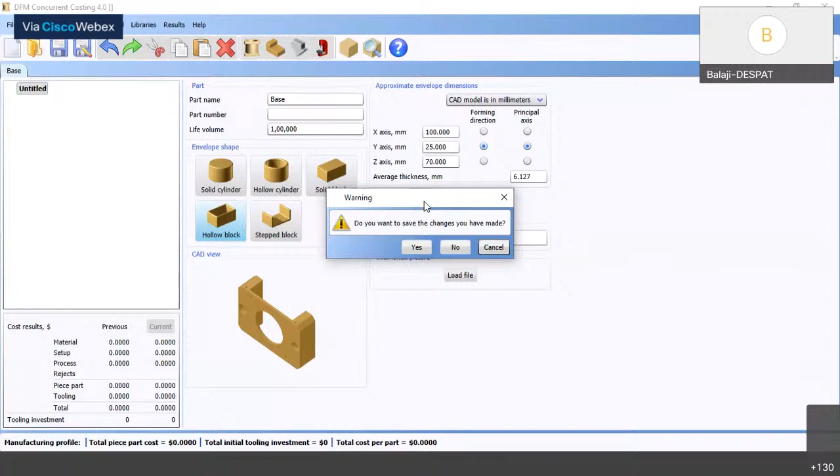Because today we can look at the plastic session, DFM for plastic. Now I will show how to import a CAD model and we can do plastic DFM analysis. So I want to import a CAD model. First I go to external CAD model, load, or you can go to this solid block icon, load CAD. You have to press that and click base.step file. Any format like STL, STEP or IGS can be imported in a DFM file.

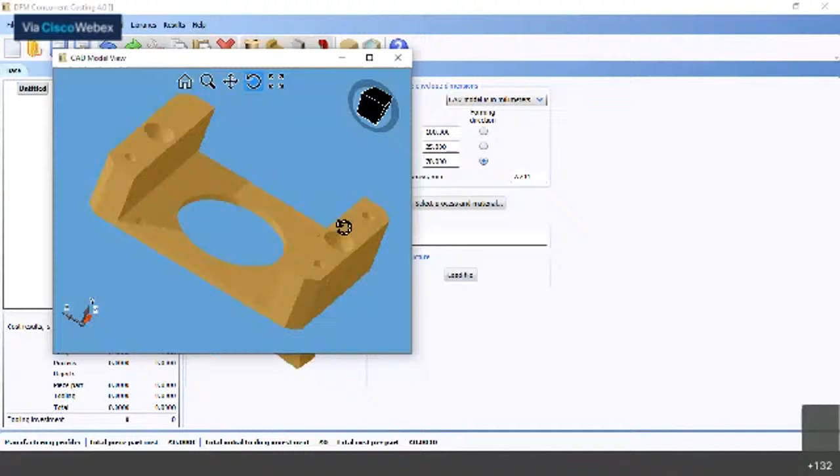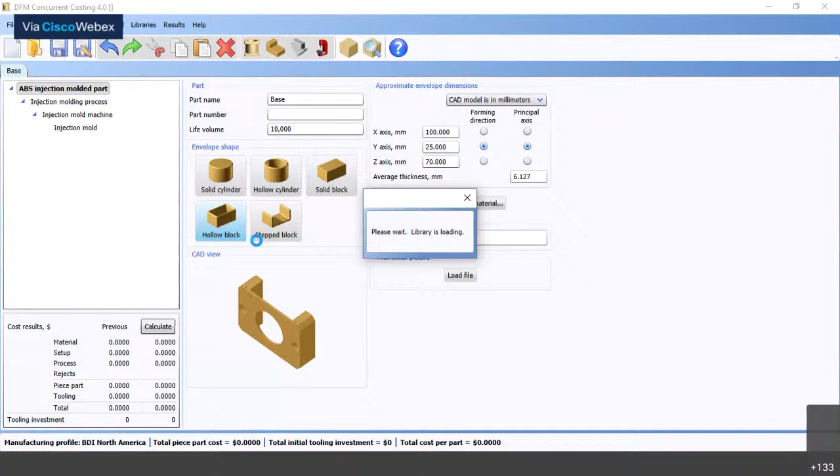So ABS is a good engineering plastic. We can choose ABS with injection molding and click OK. Part volume is shown in a yellow orange color. It's imported from a CAD model. So as of now we have done the primary operation. Now we have to do the secondary operation, like inserting a machine tool setup. To drill a hole in a part, we have to do a secondary operation. I can choose a generic drilling center machine and click insert.

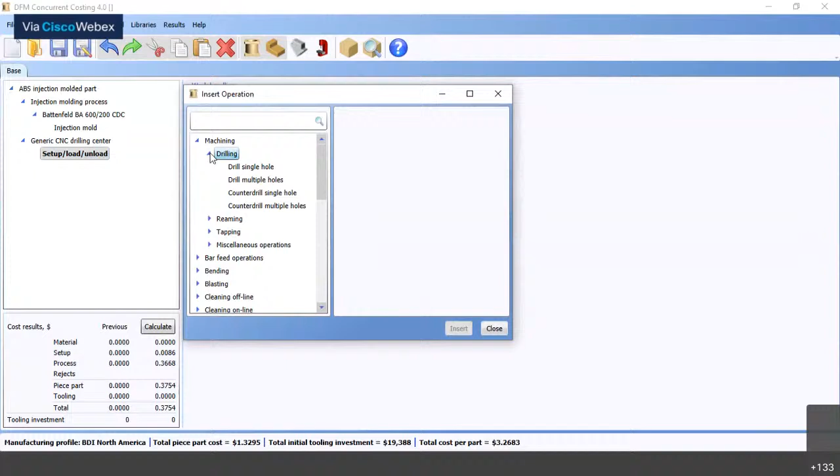I want to drill a hole. So under insert of the machining, these options are there. I will choose drill single hole, or you can choose drill multiple. For sake of presentation, I will choose drill single hole. So diameter of drill hole. In this, a geometry calculator icon will be there. Just click that one. So we have a CAD model. You just have to load that and we can take a value. Length of edge segment in CAD model, you have to click that icon.

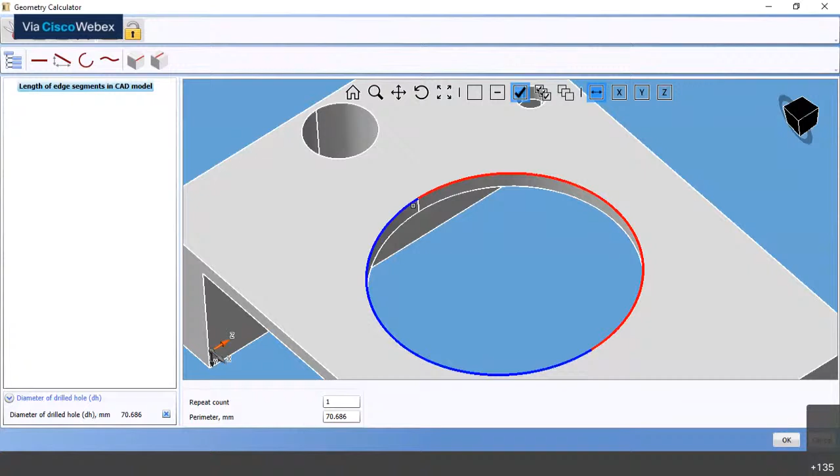Just rotate this. So with the rotating icon, just rotate this one. Now we have to drill that bigger hole. This one hole is there. So keep it as one repeat count and give OK. So the diameter of the hole is taken from the CAD model, and we proceed with the length of the drill hole. Length of a segment, same process. Length of a segment in CAD model. This is the length. We can choose that one and give OK.

Balaji, in this version, there's a correction. The diameter, no? If you click on the geometry calculator, we have to take one segment of that, not both. Just take one segment. Because the new version that I'm showing is the latest version copy they have. Here what you should do is after you do that, you have to take the X, Y, or the Z as a dimension. In this case, you take the X as the marker.

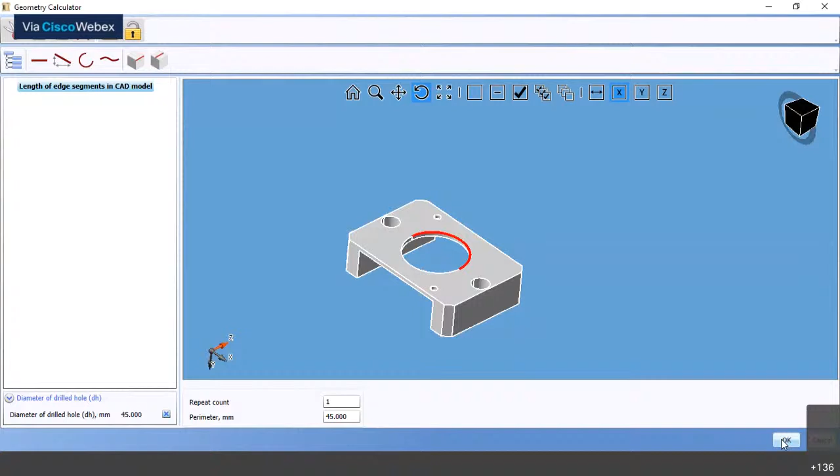So these two to drill. So I've taken it as a multiple hole. As I am having those, as he told, we can select only one. So what you're actually doing is you're selecting one portion of the arc, okay? And if you look at the bottom left-hand corner, you see the XYZ plane.

So along the X plane, if you select on the right-hand side, behind that total length, there are three options there. There's an actual diameter length, there's an X length, a length along Y, and a length along Z. Just for the interest of the audience, Balaji, click on all of them one at a time. Let them see the perimeter at the bottom.

See, in Z it is showing 0. In Y it will show 0. In X alone it will show the dimension. So click on X. Go slowly because it is a little slow, lagging is there. Click on X. This is actually the true diameter.

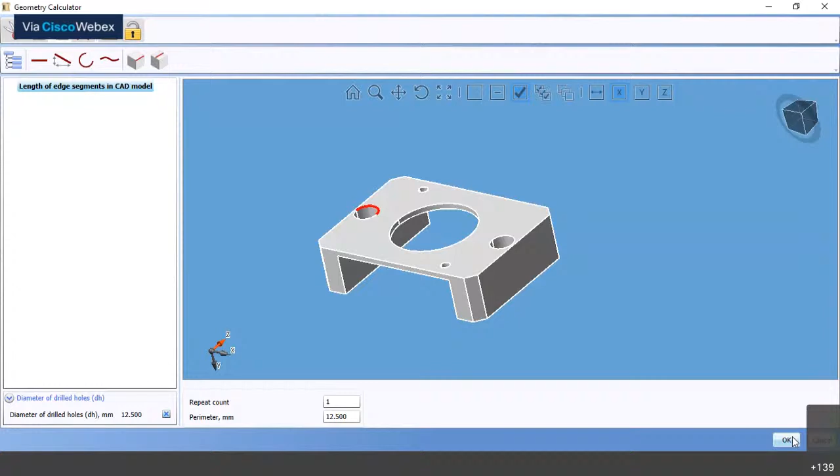No, sir, the 2 were going to drill simultaneously. Correct. Leave that as 1. You have selected to drill multiple holes, correct? Okay, sure. Leave that as 1. Repeat count as 1. Okay, so he has selected the diameter of the hole. Click on it. I have to choose the length of the drill hole.

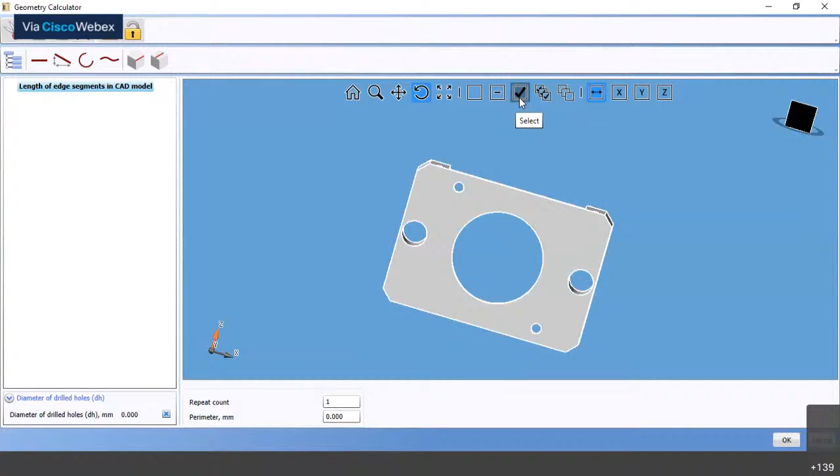So for 2 identical holes I want to take another option. These 2 holes I am going to drill. So the length I am going to capture from the two holes. The length is captured at the bottom.

This 2 repeat count now is the number of identical holes drilled, which is 2. So as he told, if we choose drill single hole, we can give 2 as repeat count. We have chosen drill multiple hole now, so the number of identical holes drilled is 2. And one more thing, Balaji, it's okay, I think we get the drift. Can we go to the process chart, Balaji?

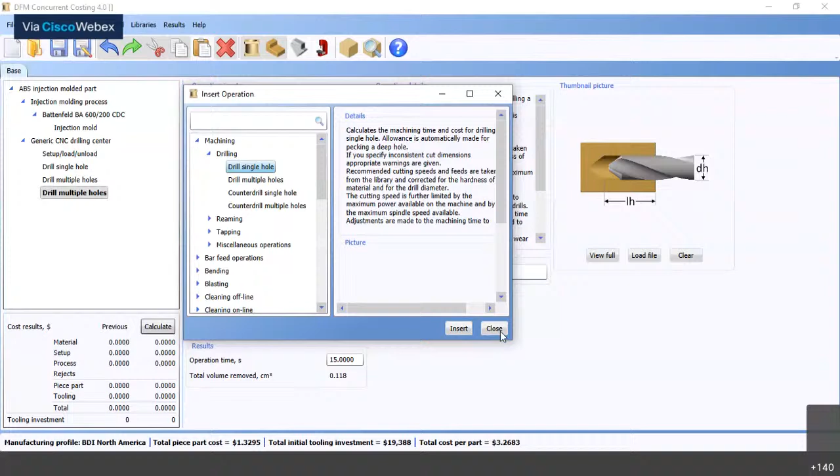So if you see here on the left-hand side, you have single drill hole, multiple hole, right? Normally, as a part of DFMA, the definition of DFMA, ladies and gentlemen, maybe this is another tip that you want to record: it is a systematic procedure to analyze and quantify product design. I'll repeat. DFMA is a systematic procedure to analyze and quantify product design. Those institutions and companies that have adopted this systematic approach are able to quantify their designs very well and find different ways of making improvements.

On the same lines of thinking, when I'm building this process chart, imagine if this was a product that had multiple such holes and features. It'll just be drill hole, multiple hole. So what we normally would do, if you're in a company and have a process chart that you follow, you would actually have titles for each of them. For example, in this case, you can click on the drill hole in the process chart and call it dash centre big hole. Next, multiple through, you can give it a name after it. So every time you include a process, make sure you identify it uniquely.

But you may say, sir, this is only a project I'm doing in college. Maybe you understand it. Let us say you look at the same project 2 months from now, or you send it out to somebody who has to review. It should be easy for them to review it and understand, oh, okay, this guy is taking this feature from that drawing and that's what is marked here. So that systematic procedure includes having your process sheet identified very well. That's how you'll probably find faster success when somebody is reviewing the process sheet they already have, manual or otherwise, and comparing it with your DFMA documented process sheet.

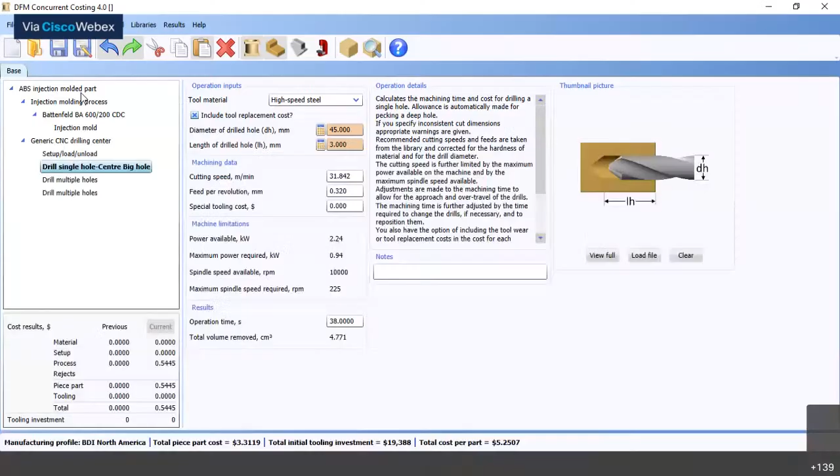Yes, Balaji, please just continue. I think they get the idea of how. Now, one more thing I'd like to tell you, Balaji. Keep your system on. Keep your CAD model on. Wait till I say I'm done and then we can come off. Now, if you look at this part, can you open the CAD model, Balaji? Please save this file. Don't delete this file. Save it if you want to come back to it.

If you look at this part, ladies and gentlemen, it is an injection molded part. Can you move the CAD model aside, Balaji? Come on, move the CAD model view to the side. I want to see the life volume and all those details.

So now, if you look at a volume like 10,000 pieces, normally the features which Balaji just showed, like drilling holes and all that, would probably not actually be a secondary operation. You would get these features done as a part of the injection mold itself. But in the interest of this demonstration, he has done this, showing what if you want to drill secondary features. That is the objective of this demo. I hope it's making sense.

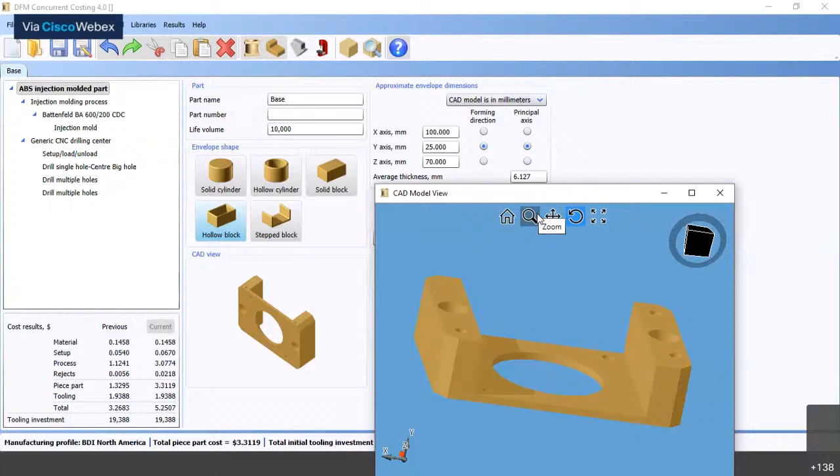For a plastic part, these kinds of features can be precisely molded in the injection mold itself. Making sense? But let us say you're not doing it, you want to just make one part. Balaji, can you make a copy of this one and make a material selection as nylon? First of all, save this. Rename the part as base dash nylon.

Yeah. And go to the top first level and make the quantity 10 parts, life volume. And select the process and material as machining. Yeah, full analysis. Great. Take nylon.

Ladies and gentlemen, what we're showing you today is: I have a part idea. I'm exploring for injection molding. Then I realize, oh, I only have to make a prototype at my college. I don't have to make 10,000 pieces. What do I do in such a situation? Then you can just take the resin. You don't need the filled plastic, it's expensive. You can just take the nylon, the next one. Plastic, plain resins. No, come down here. Yeah, that one. It's a plain resin. Yes.

I want to just machine 1 or 2 parts for my project. I don't need to make 10,000 pieces. You have a decision to make like that. So I'm just doing another alternate material. I could also do it with ABS, but okay. So it is asking you to switch. It's switching the data from your previous selection of ABS and injection mold to the new one, so it's asking your permission. You say yes. Now you have an entirely different approach to looking at the same rectangular cuboidal part, and you start machining it from a block of nylon.

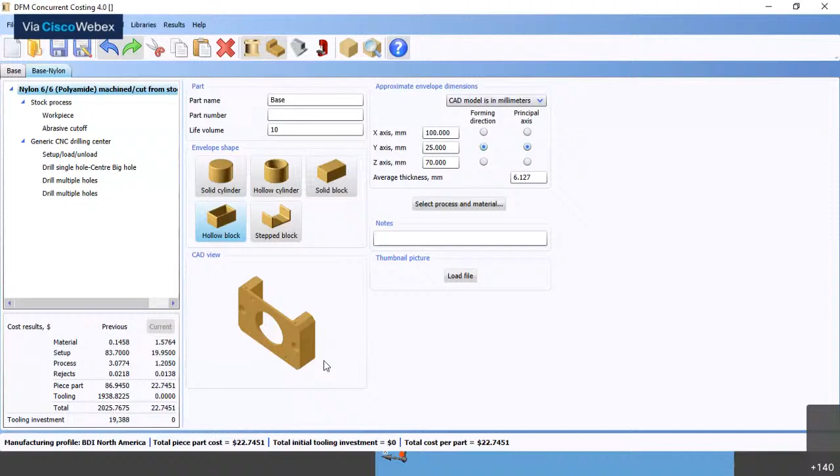So go back to the nylon, Balaji. As you can see, we have retained some of the machining steps from the previous exercise, the generic CNC machining. It is valid for a part like this. But the previous primary process is changed to a stock process. Can you go below for the next slide? On the stock process, click on it. You see the data from the CAD software has automatically come and is highlighted in the part volume in orange. Okay. Go to the next item.

Again, let me go back. Sorry, go back to that stock process, Balaji. So you have 10 pieces. It has selected a batch size, showing it as 1, and it's highlighting it in yellow. If I want to make 10 pieces, it's a bad idea to make one at a time. See, the setup cost is so high, 19.95. Can you see it on the bottom left-hand corner in the cost results?

So a logical or better solution would be, if I want to make just 1 piece or 5 pieces or 10 pieces, it's better to do all of them in a single setup. So I would rather change the batch size to 10. Can you do that, Balaji?

So when you have your ideas charted out on the left-hand side in your process sheet, review it one by one. If you want to sit with an expert who knows how this process has to be done, how this commodity has to be done, he can contribute well. Go line by line item, and that's how you'll probably get a very good, accurate result of your prediction. Why? Because the systematic approach is what will help you to solve. Any of these elements can drive the cost. Just know that. I hope it's making sense.

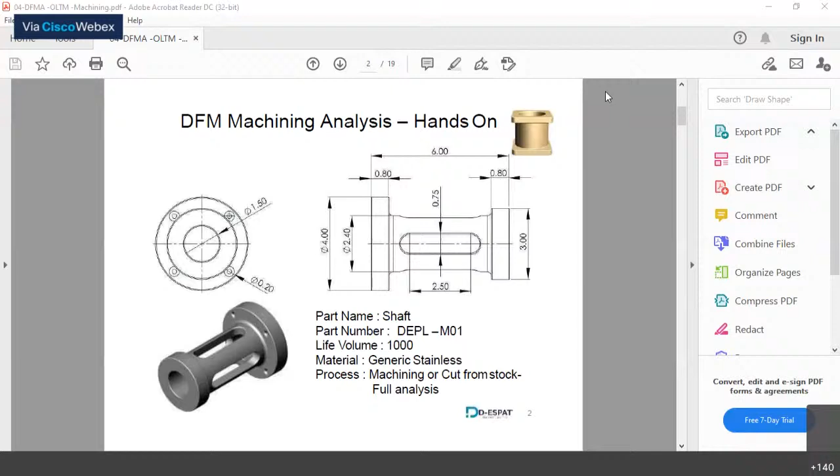Do you have the drawing? Not this one. The drawing which we have to do as a demo. Ladies, this exercise is given to you. You will probably do this exercise in your free time. But for the demonstration purpose, we have a simpler drawing. The image has been given to you. Do you have this image?

Balaji, I think. Okay, Balaji, can you stop your sharing? I will take it from here. I'm not able to see your screen. Organizers, can you help me to share my screen? Just assigning you, sir. Thank you. Now you can. I can? Okay, thank you so much.

Are you able to see my screen? If you have not got this image at hand, take a screenshot now. Okay. Now let us look at this component for a minute, and I want some participation on the chat box. Here's what I'm asking you to do. This is a component that's going to be machined. So you can imagine I have a raw stock I have to take. What should be the shape of the stock?

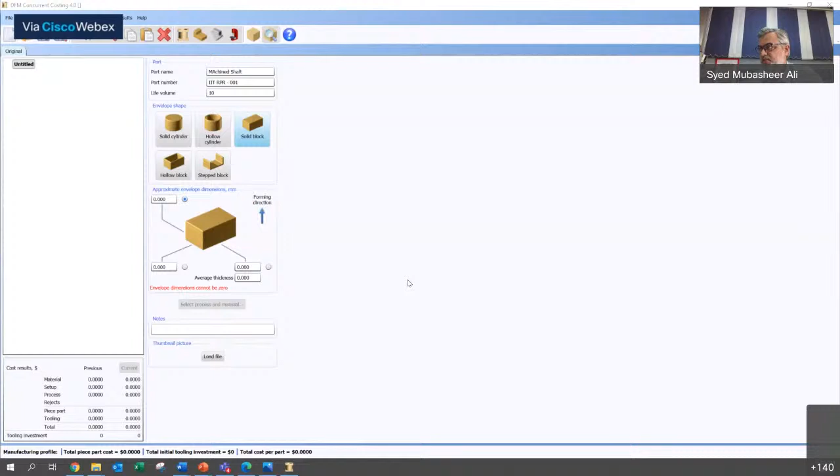So what do you think is the envelope shape I should select for this geometry? Absolutely, solid cylinder. What could be the overall dimension I should give here? What is the diameter and length here? No. So here's the answer. Hold on, guys. Whatever you give as envelope dimensions, please know this, that this is always of the finished part. This is not of your raw materials. I hope that's an important learning. You will always give the envelope dimension of your finished part, not of the raw material.

So this is going to be a 300 mm length, and this is going to be 75 mm, right? And since it is a solid cylinder, you could give a different average thickness. You could go as high as this. You could say the average thickness is 75. It doesn't make a difference unless you're selecting a hollow cylinder. Okay. Yes, always the finished part. Now let's go and select the process and material. Now we'll go to machining.

This is a very good crowd. I like it. Everybody is participating well.

So there, if you see in the machining, there are different opportunities. For the sake of this learning, we're going to take the full analysis. For others, if you want to learn, you're welcome. While you have the software with you, you can go to the help menu. In the help menu, you'll find online tutorials.

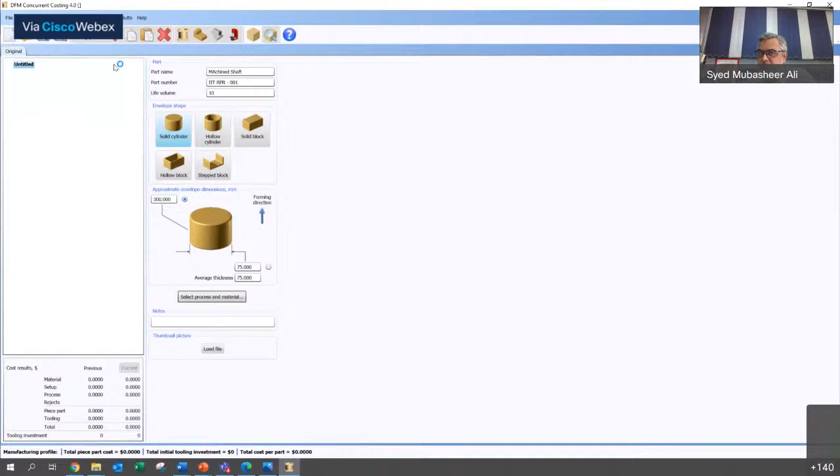If I click on online tutorials, ladies and gentlemen, you will find a lot of videos that are on our principal's website of the previous and this is the new version. You're free to go look at it, download it, and learn from this while you're having the software at your disposal. Okay. Please feel free and do some interesting stuff and share with us. We'll be happy to share it to the rest of the world of what you're capable of doing.

So let me come back to this and take machining and take full analysis. And I'll just take, for the sake of this presentation, maybe an aluminum alloy and say OK. So what you're getting now is, again, remember, when you select this first level selection, you get the primary process and all activity related to the primary process will be listed on the left hand side.

I repeat, when you select your geometry, when you select the life volume and then go and select the process material icon, and then when you have a commodity combination, what comes out for you is this primary process. So depending on the process combination, you have this list on the left hand side, long or short, depending on what immediate activity is connected to that primary process. Making sense? Say making sense or yes in the chat box.

Okay, so now there are a few ways I wanted to see how this, especially from a machining perspective, impacts. Yes, batch size usually is a divide by 8 or a divide by 10. That is a default setting, but we can go and change it. And that's the first one amongst the selections I would make and calculate. And the impact of the batch size directly hits on what we call a setup cost.

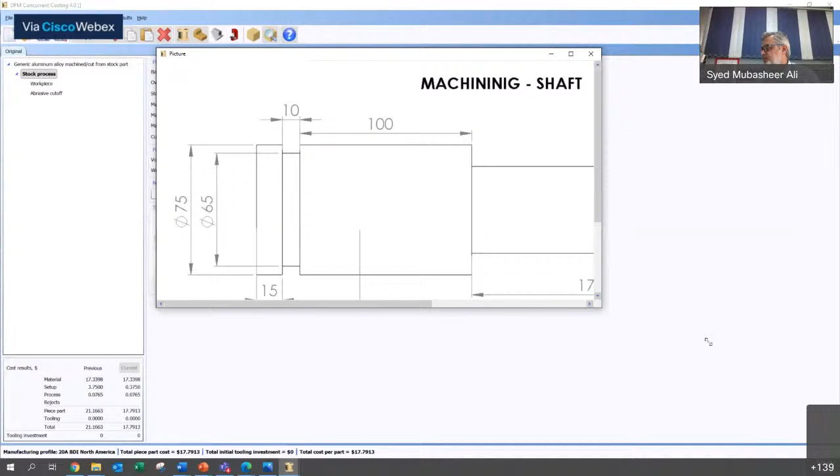So another thing is, since I'm working on this part and I have a drawing, I can load this file. This is something that we've not shown you previously. So here's what you can probably do. I can go to this part and pick up this shaft drawing and get it in. So every time somebody who's reviewing my drawing knows where this is. Oops. This picture is gone somewhere else. So I could look at it. So you can have records of such steps all through your different stages. So you can load files at different stages if you want. Yeah. Let me get back here.

So the round bar is fine. This is the cost that is taken from the database. This is a material, scrap material cost. Now it's asking, imagine you have a long stock, if you're seeing my screen. Now you have to cut it into segments of whatever lengths you want. So what method of cutting off you are employing will determine certain amount of cost here. So right now, if you're using a bandsaw and you calculate, this is going to be the impact on cost. If you select some other method, it's going to be an impact on cost. It's more expensive than this one, right?

So normally the defaults will be the most economical setup, but when you're actually doing a practical, you may not have this. So you go and closely select whatever you have as your practical setup and do this. Guys, you have the tool at your disposal. Himanshu, please try that. I have 20 minutes to finish this demo, and if your time permits, we'll explore all of those details.

So the next thing that I want you to know is this part volume is estimated from the geometry, and as you keep machining the part, remember we are going to start machining the part, right? So as you start machining, you'll be removing material. As you keep removing material, that material removed gets automatically subtracted from this volume, and that will add up directly to the weight of the product. This is one way you could do this exercise. But let us say you have imported a CAD geometry, then you will see this in what color?

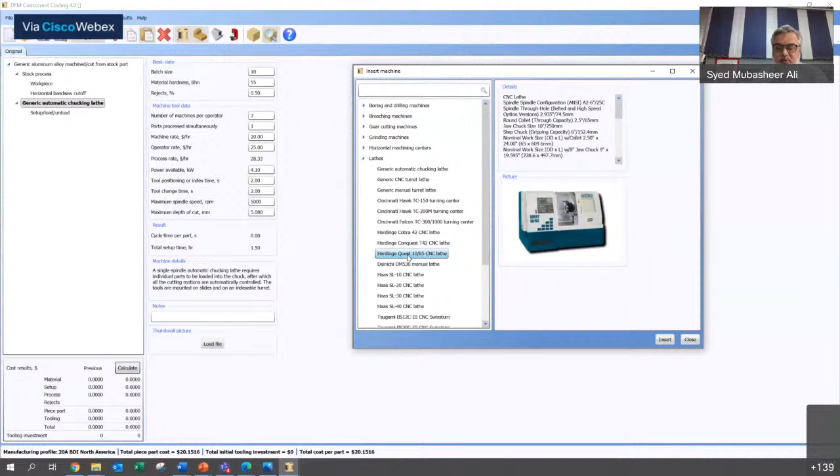One more thing. I'm looking at all of you as DFMA future champions. Don't get very benevolent and select complicated products or machine tools to do your job. A good DFMA guy will select the most economical machine, because your job is to be as stingy as you can, getting the best time and the lowest cost for the product you want to build for your company. Get it? So if something can be done with a simple machine, select it.

If your handicap is that the only machine you have is something like this, fine. Otherwise, don't get too benevolent and select fancy machines. Nothing fancy. If you can do it on an economic machine, that should be your benchmark for costing. That's how we work. Fair enough. So that's the machine that we have selected. Sorry, it has selected twice, so let me delete it.

And you know all this, right? You have the opportunity to change business rates and so on here. But something you may not want to change is the basic process parameters of this machine, for example the spindle speed, the kilowatt hour of the motor that operates this machine, and so on. Since it is a lathe, I'm more comfortable having a lathe with a 3-jaw chuck because it's easy to lock and unlock.

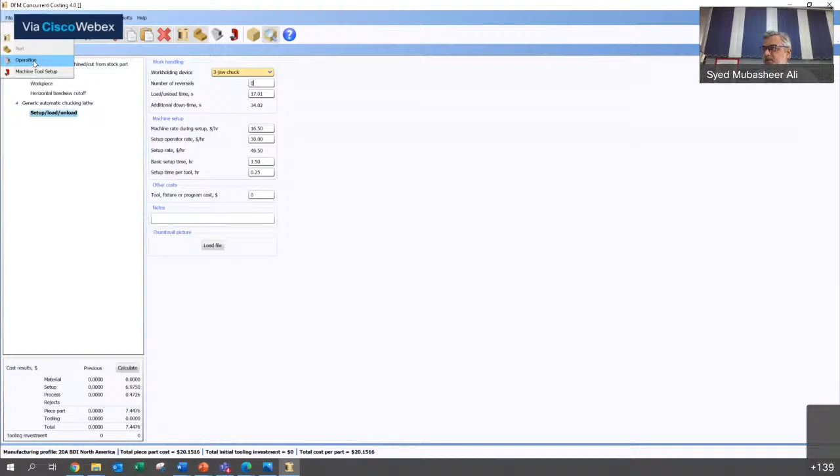Right now you see it's also asking, do you have any reversals? I am not selecting now. As I keep building the steps, if I think I need a reversal, I'll come back and add the reversal information here. Let's go add an operation. I'm going to machining and I'm going to say turning. I can select multiple of these. For the sake of speed, I'm going to say rough and finish cylindrical turn as my first option.

What I want to do there is refer to this drawing. Imagine that this part is actually 77 in diameter and about 310 in length, right? So I have to bring the whole thing from 77 to what diameter? 75. I want to do that through and through for about 300 mm length. Okay, let's go do that.

I'll say the workpiece diameter DW is the outer diameter. This should be 77. I want to machine it to DM. You see the drawing here? That should be 75. Absolutely. And the length I want to machine it should be 300. Get it? I give these 3 inputs, I calculate, boom, I get all of this information. Ladies and gentlemen, I want you to notice, and I think I've emphasized this previously.

Many people think, oh, this is one big Excel sheet calculator. Well, there is more to it than this. Because if I show you the operations library for turning operation, and if I edit the formula, that is the formula that's running in the background, ladies and gentlemen.

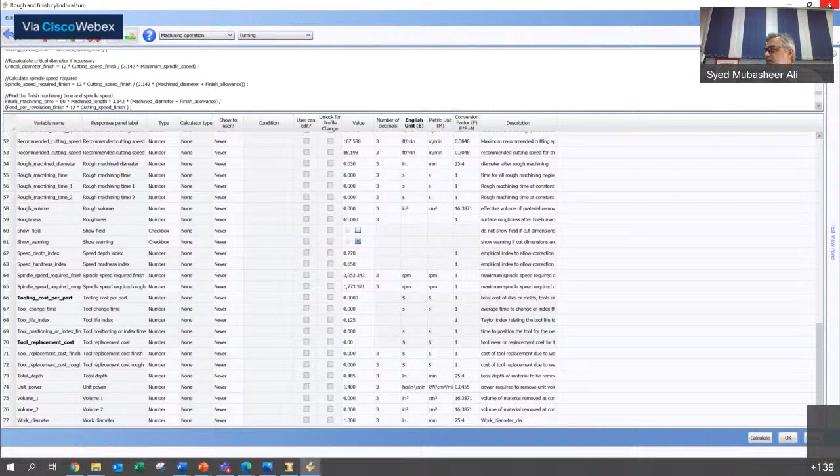Yeah, and this is the number of variables, about 77 variables running in the background. Okay, but is the customer or the user bothered with it? No, only those things that he needs to focus on his design is going to be here for his review.

Okay, so what comes out here apart from the cost is, I want you to notice that the actual machining cycle time for this operation is measured by the software. The amount of material removed is measured by the software, and if you go up, if you remember, this volume will keep on getting changed, rather reduced, as you keep on doing the machining steps. Okay, so I've done one step here.

Let's go back. Now imagine that we've run it for 300. I want to machine this for 175, reducing the diameter from 75 to 50. So I'm going to do that step. Okay. Let me insert an operation of rough and finish cylindrical turn. Now I would start with 75 as the diameter.

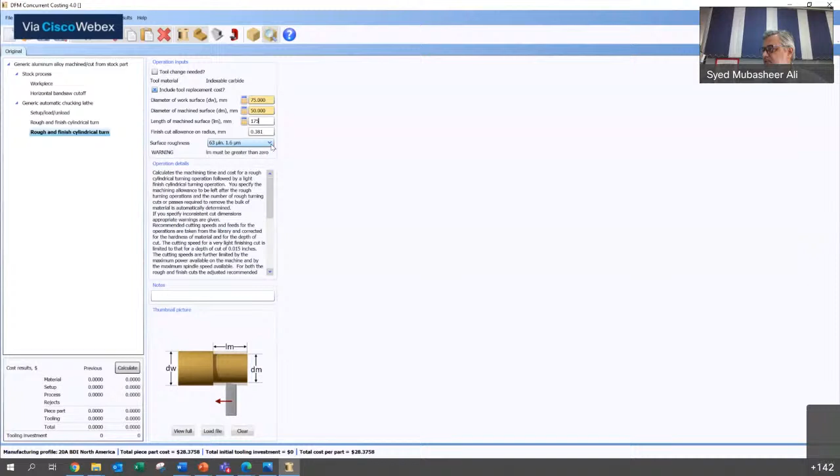Just give me a second. 50 as this dimension for a length of 175, and of course these allowances, you have choices to make, but right now I'm leaving it at the default to quickly run through the steps. And as I said earlier, I would normally name this stock.

I would give names like this so that if somebody wants to review my design, they know what these steps mean. And sometimes if it's complicated, I would actually take snapshots and put them as my own thumbnails here to make my explanation much easier. So two more steps I think I will add. I hope you're getting the drift of it. So let's create this profile of a dent here, and let's create a drill on this side.

So as I insert an operation of grooving, this perpendicular groove makes sense, right? So I will select that. Maybe I'll rename it a little later. I'll also do the drilling of this hole, add that, come back to it, and say this groove is about 10 mm. It has to go for a depth of about 5 mm.

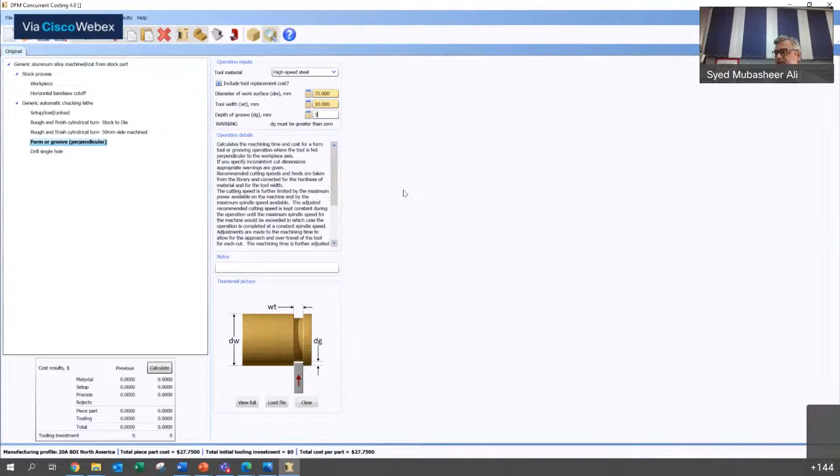Okay, so the diameter of the work was 75. Guys, you're following me, right? Tool width is 10 and the depth is 5 mm. So that defines a groove, and the single drill hole is on the right hand side. So it's about 16 mm diameter and about 50 mm length. So I'll say diameter is 16, depth is 50.

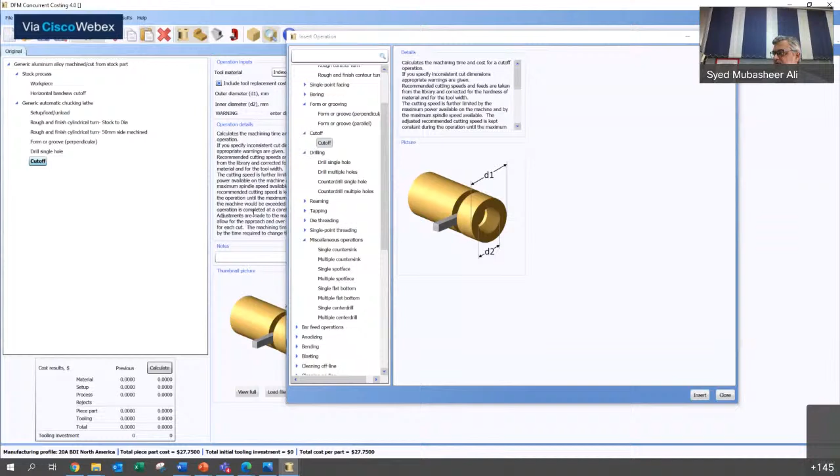And it is finished. So I have done all of these features. What I have to do now is maybe face off or cut the part. I'll insert an operation to cut off the part. Okay, normally this is not exactly right, but you need to understand you definitely have to do this step finally. So I'll cut off the part from an outer diameter of 75 to 0, correct, and calculate.

And all of this closely defines my process. There's nothing like why not, right? When you think of why not this, why not that, gentlemen, just know this, that there is no one way of fabricating this part. So if you have a challenge with how your colleague or somebody else is doing it, take it up, paste it, rename it Himanshu's doubts and do whatever you want to do. Rechange, reorder, create a reversal, and see the impact right there.

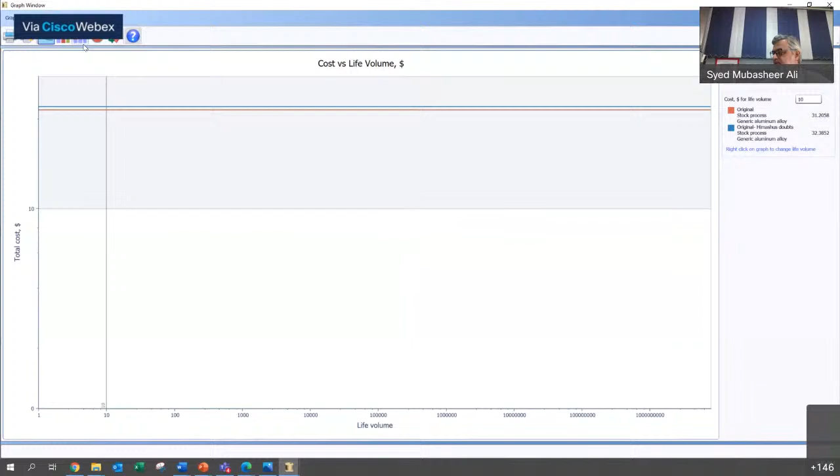Get it? So that's that. You see, this is the impact of the original Himanshu process, right? I just added a reversal there. That's why it's adding that cost. Okay. So how does it play out on cost? You can see all of these details. So even finding finer details like this makes sense.

Now, one more thing is don't get stuck up too much if you're a part of decision making, because you see there's almost 70-80 paisa difference, which is substantial. Another thing you should know is right now I kept the setting at 4 decimal places. If I set this to 2 decimal places, it's not so significant, right?

So make sure when you're doing reviews, you are keeping your decimal places to the right thing, depending on the volume that you are making. Because if you're doing 1 part, 10 parts, the 4th or 3rd decimal place doesn't have so much relevance or significance. So I hope you have a copy of the exercise that is to do the machining.

If you have any questions around this, we will take it up now, or we'll go on to the next topic, because we have lots to cover for today. And we also want to discuss an exercise that we would like you to take up.

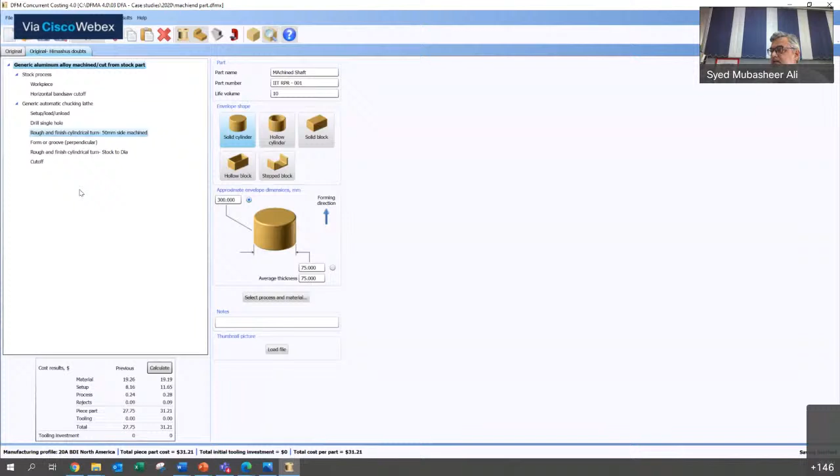Okay, let me make sure that we are okay with the starting, right? What we are supposed to do is... so this is your workpiece geometry that you started with. So what happens is the value of this geometry is estimated in your material cost. Also, I want you to know that in the stock process, an important aspect is there's a cost of material and there's a scrap value of a material.

Now I have a question for you. If I make the scrap value 0, okay, please note the question. If I make the scrap value 0, what do you think is going to happen to the material cost of my component? Is it going to go high or low? Right?

So what it means is you are having a raw material cost that you are incurring when you buy the material, and then when you are machining, the wasted material you are able to sell off at a price. If you're able to sell off at a price, that is subtracted from the overall cost of the material. So if I have a good recovery rate for the material, I'm just putting an arbitrary number as 1 and using it for calculation, then that cost is recovered.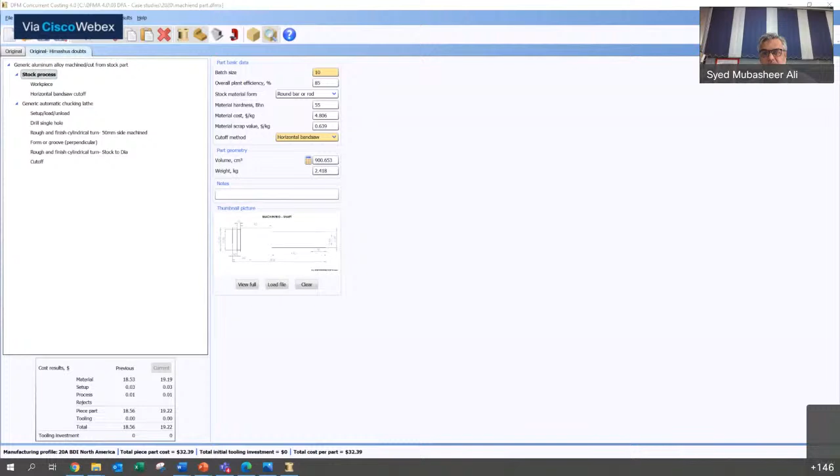So if you're able to see my screen, I wanted to show these activities today. Now, yesterday we built a part. Today we've done the component in DFM. I can actually show you how I can bring these parts into DFA, where the cost that you analyzed can be imported directly into the DFA tool.

So just give me a second. I'm trying to open my... I have two screens here, so. Too many things. So I'm opening up the DFA screen. Let me take up the old part that we did.

So if you recollect this DFA exercise we did, no, you're going to get the assignment now, Rana. Hang on. What's the hurry? Going somewhere? You're with us till 11 o'clock, right? Super. So hang on. The assignment is coming. It's a simple assignment, but it's in depth. If you can do it right, there's lots we can learn from that simple exercise. I'll be sharing it with you.

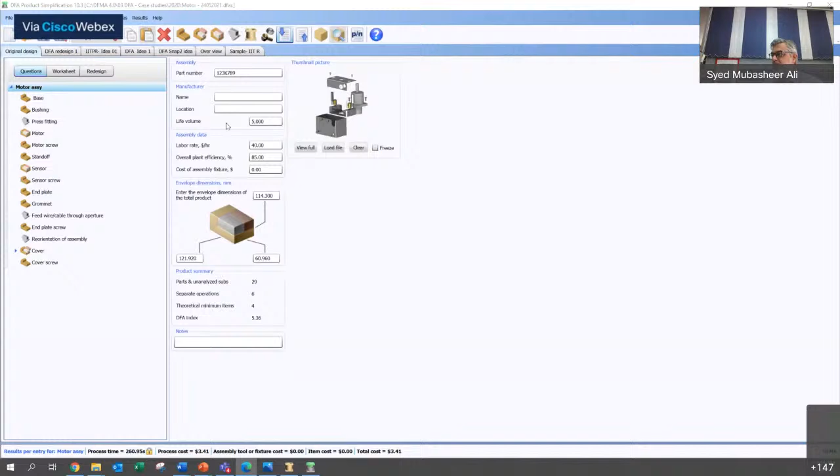So if you remember this end plate, this component, right now I got it as a part, correct? Now you also remember yesterday in the DFM, I had done analysis of this component as a sheet metal part, if you recollect. Right, we did this part yesterday as a sheet metal part.

Now imagine the DFA was done by some set of engineers sitting somewhere else in the globe, and they're accessing a server, and the actual part level costing for the components was done somewhere else. So through concurrent engineering, a quick demo is what I want to show you here. I can go to the end plate, I can right click and say, hey, connect this to a DFM analysis by linking it to an existing file. I can link it up, and about where I put this up there.

Just give me a second. DFA case studies.

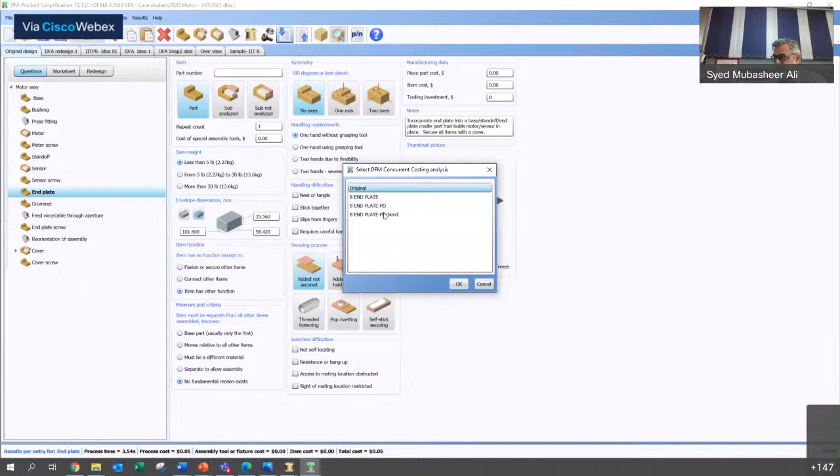And now when I open this file, it is saying, hey, in this DFM file, you have 4 different analyses done. Which of them do you want to link to? I want to link to the last file because this is the most precisely estimated file. I can click this and look at a few things that are going to happen. Look at this image. Right now it is that of a part, right?

When I click this and look at this manufacturing data in the DFA file, 2 things I want to show you. The image of the existing part before I link it is showing the image of this part icon, and the manufacturing data is something which I can edit. That's how these menus are right now.

But when I link it to a DFM file and I say OK, you see the image changes to a symbol like this. It means it is a thoroughly analyzed DFM file that you've got here, and the manufacturing data is locked in. You cannot edit it. Why? Because this is being driven from this file.

So imagine I have different parts, different vendors or different teams working simultaneously. As each of them are doing work, you will get these parts into this. So when you're going to do your group exercises, which I'm sure you'll be given opportunities to do,

Repeat. Okay, Shashank is asking me to repeat. Can somebody? Oh, you can't voice out. Can somebody do something on the chat box to backtrack what I just said? Okay, one more time.

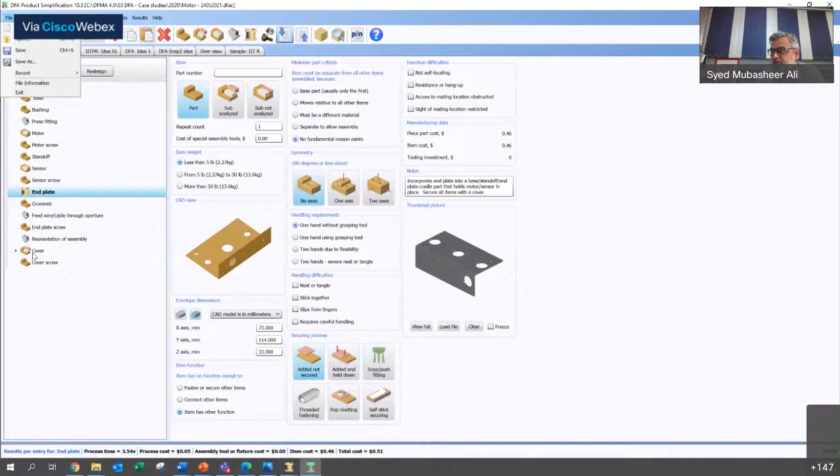Let me take another part. What I'm trying to show you here is, if I have an idea of a part, and let me take the cover for that matter. Okay, I've taken an entirely different part. I have a part. I have done an analysis of this idea at DFM level for this component. Yeah, let me take this image. You can imagine this sample, right?

Now at this level, I only have an idea of these parts, that I want to have a base part. It should have a motor, a sensor held by sensor screw, and I have an idea for cover. This is one activity I've done in the DFA. Simultaneously, let us say my other team members have also done a thorough analysis of the component. Let me take another component, for example. Let me take the cover, which we did on day one, cover IITR. Okay.

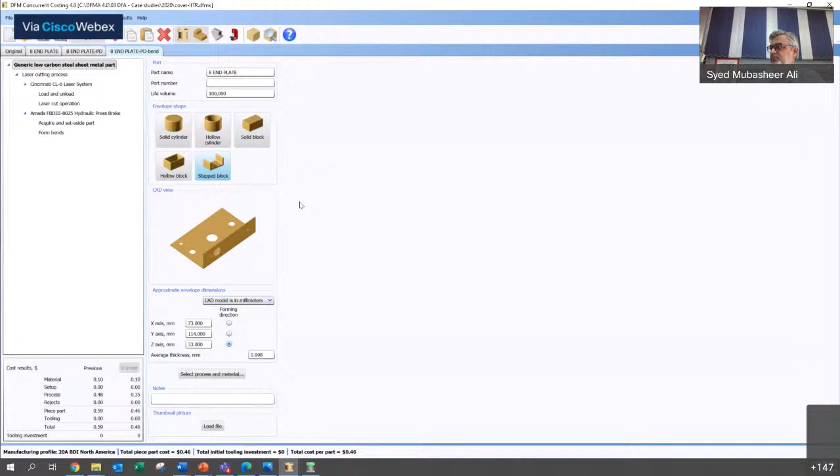So remember, we did different kinds of covers. We did casting, casting with the Greaves database. We did it in sheet metal. We also did it in plastic. For the same geometry called cover, we have a DFM file that has been analyzed. What I'm trying to show you here is, I have this component and I have an overall estimate which I have keyed in. But now I also want to have done a thorough part level costing of this component.

And I want to link them, because DFA and DFM are actually true concurrent engineering tools. They can work simultaneously, transferring data from one to another, thereby helping you to get rapid feedback of your design intent, giving rapid quantification of your design idea, thoroughly getting part level cost, and also getting assembly level estimates for time and cost of putting your assembly together.

What I'm showing you as an example is, I'm able to link this file. How do I do that? I click on the component, I right click and I say DFM analysis. I have two options. I can create an entirely new analysis, but since day before yesterday we already did the DFM analysis of this component, I'm linking to a file. When I ask to link to the file, it's asking which of the files you want to link to. So I will say link it to the cover file.

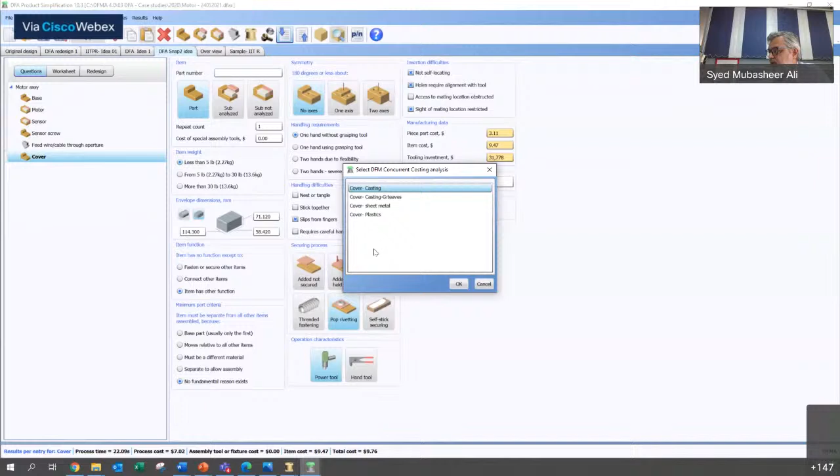When I bring up the cover file, it says, hey, this cover file has 4 different analyses. Which do you want to link this component to? Let's say I want to link it to the plastic, and say okay. The data of the plastic component, the tooling cost of the plastic component from the DFM file, you see this value 38,000, 14, 6.69, all this will automatically come into the software. Making sense?

You are welcome. Now your job is to do something like this interestingly and come back to us and say, hey, we've done something of value. Okay. So that was the third part that we did. I think we're good on time. That's nice. Now, I also want to show you something related to this bill of materials.

Let me close this. I don't want to save it. And this is another sample that I want to show you. Sometimes in your CAD software, you'll probably be making your, yeah, there's nothing like true design. It's something like saying perfect product. It's one design. Okay.

And you've already done a CAD model in which you have created the bill of materials. Again, I want to show you here that you can add a CAD model from your software into the DFA file.

And where is the data? I don't remember where I kept it. Just a second.

So I can import a CAD geometry like this. In the DFA, what will come through is the overall XYZ dimensions of the envelope shape. So my setting, sorry, my units are in inches. So let me change this to metric. It makes my life a little easier.

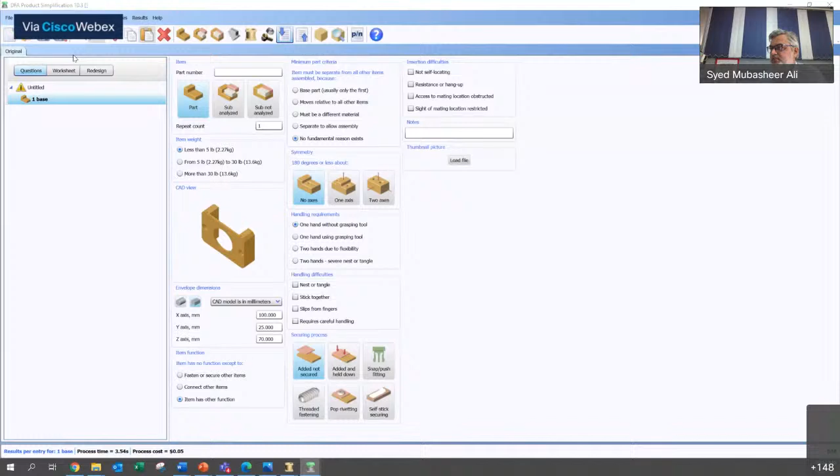Okay. I can also import a bill of materials. So when I say import bill of materials, you have this data example in your exercise in your files also. This has been loaded for you. So I'm taking any of these two options that are there. One is I can have a text file, or I can also import comma separated values, or CSV files as we call it.

Let me open this bill of materials for the motor. Imagine if this motor file was already made. If you want, you can do this alongside with me, if you have the software and you can simultaneously do this, otherwise don't bother. We can send this out. So usually, if you look at it, there'll be a lot of things that the CAD software guy would have done as a part of the.

So normally, let me untick this. See, the data will be jumbled like this. Yeah, comma separated value. So if you select different delimiters, you'll see how the data regroups itself. One of them will work for you well, depending on how the format is imported. Just be patient enough to do this one time so that you figure out what is the delimiter that is working from your exported file. Okay, so this is a one-time exercise.

Second thing is, where do I start importing from? See, this is the name of the file. I don't want to import this. I want to import from row number 2 because this is where the actual data is. So I'll say start importing from row 2. And when I click on next, now it is saying, can you please map your CAD data based CSV file to what you want to get into the DFA file.

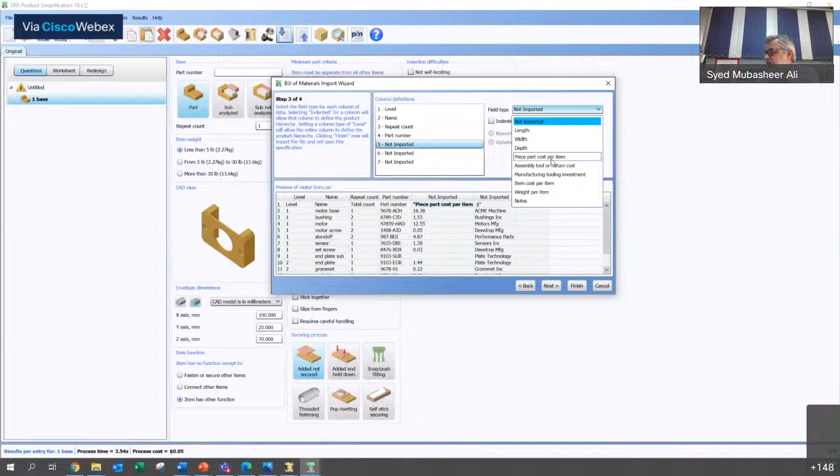Column number 3 is total count. I click on it. For us, total count means repeat count, a word we use as a terminology. So we'll say repeat count. Now column number 4 is part number. So I'll say part number. Column number 5 is piece part. I will say piece part cost per item, so on and so forth. I have not created these lists, but you can go and add this kind of information.

And when you say next, and if you're going to regularly use the same format, you can give it a name, IIT Ropar format, something like that. And I say finish. What will happen is you will get the quantity, the part number, like I've added the supplier name to the notes. So all of that will automatically come here.

Okay, but definitely what you have to do as a user is, this is only creating one kind of connect from the outside world, which is CAD or ERP solution or PLM, into DFA. But once it is here, it is our job to answer these questions so that we get the assessment right. Making sense?

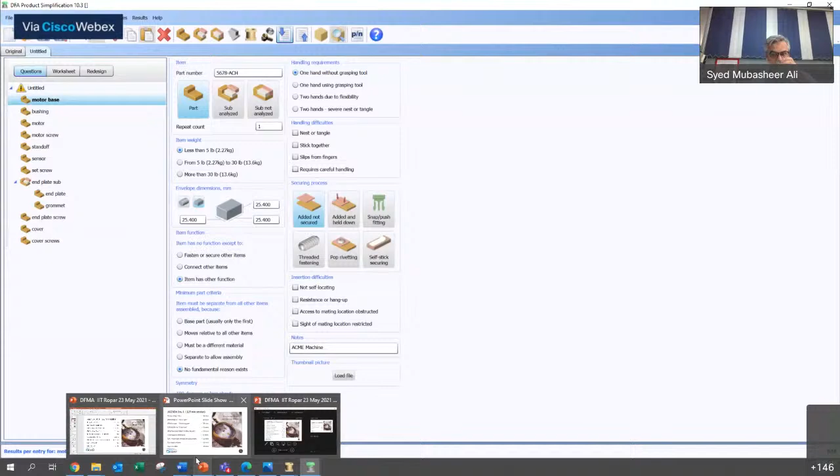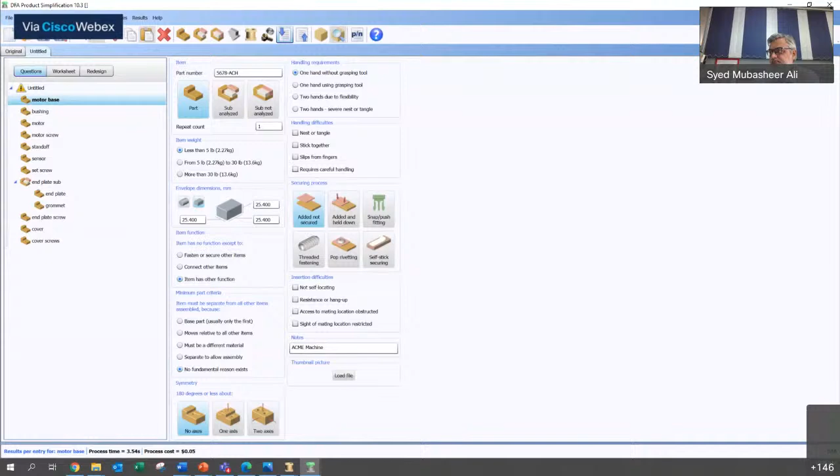So that's the other thing that I wanted to show to you. And please note that there are different types of reports that you can generate from the tool. And there's also ways in which you can customize the reports, and there's also ways in which you can export out the reports. Let me just quickly show you a few things.

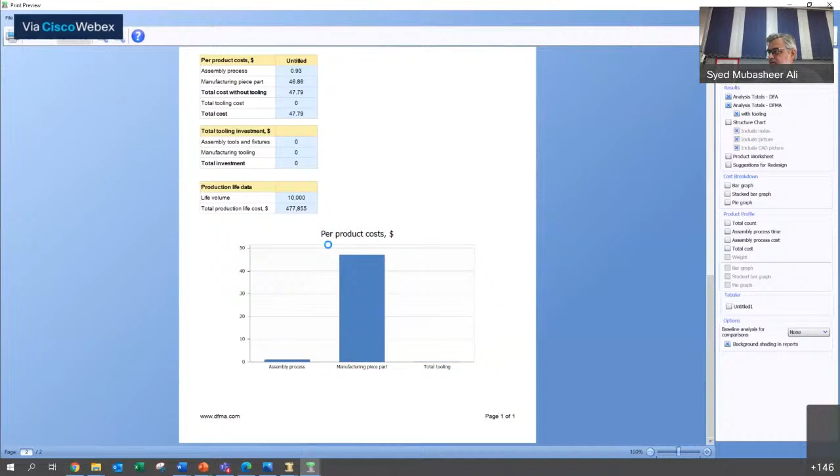Right, so I can generate different types of reports here, one after another, and I can change the currency in the reporting. So wherever there's a dollar value, it will change to a rupee value or whatever is the conversion that you're giving, because the dollar or the value for cost is a part of the large calculation.

I hope you understand. I've shown you 2-3 examples of the algorithms and the calculations that are running in the background. So there, the cost is defined by that value or by that symbol, dollar. Whatever you want to change it, you're free to do it, but also make sure that the other things are also appropriately right. For example, is the labor rate appropriate to my setup and where I'm doing the project or where I'm making my component? That also has to be corrected.

That will make your prediction suitable for the location or for the enterprise from where you're doing this, for whom you're doing this costing. And also you can export out these documents in several different formats. So depending on who you're sharing with, somebody who you don't want to edit, blah blah blah. So that's how you will probably do it.

So that's my exported out file. So you can create an export out file. You have opportunities for changing logo and all of that stuff, which I think you guys could be good at exploring. You can go and change your logo by clicking on that icon here, and you can create several different opportunities for doing this.

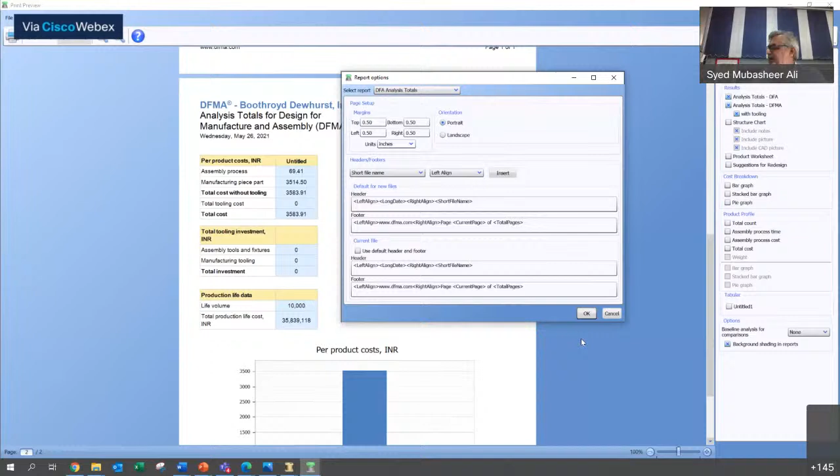There's some customization you can do on the report options as to how you want the margins, blah blah blah. Because at the end of the day, you may be wanting to share your data out to the outside world, like your vendor or your project report or whatever the case may be. Okay, so far so good.

We have 2 or more titles that we want to cover. So I'm going to take a few minutes to show some case studies from a few backgrounds, and then I want you to keep some prepared questions that you may have towards the end of the session, because these 2 things we're going to announce.

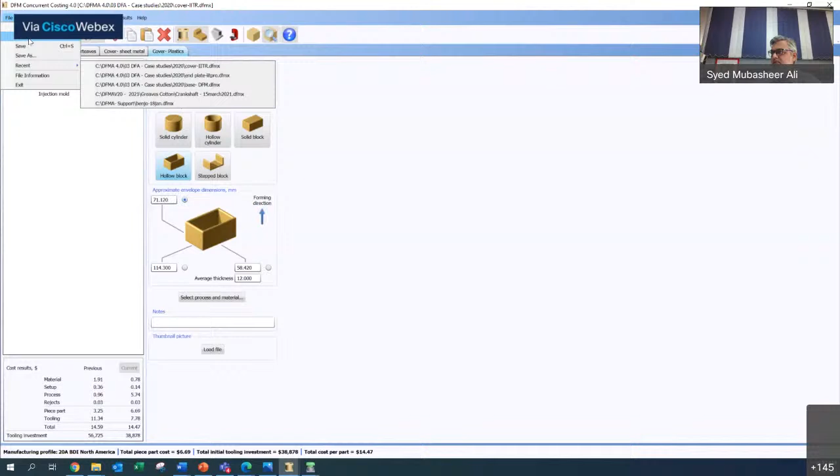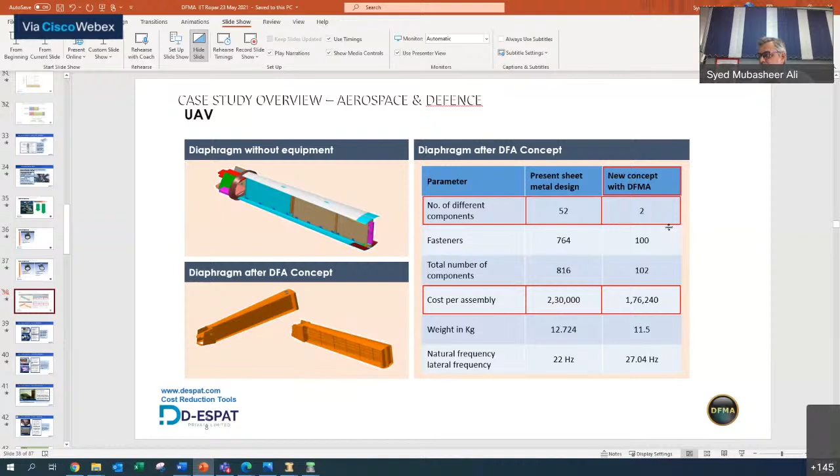So I don't have all of the sheet metal parts analysis, but this is the one finally that was selected if you make it as a singular part. Now this kind of design is sort of disruptive, to make somebody think through from a 52-part assembly to making a singular part, whether as a cast component or as an injection molded component or machining from a raw block, like an example I showed earlier, like this.

But these kind of things bring about high value when you actually explore it thoroughly. Sometimes it could be very positive that you are able to bring about a good amount of savings. Sometimes it will also help companies that have this notion that maybe this is a better idea to do it as a singular part, by proving that it is not a good idea to make it as a singular part.

Thereby, it gives them the confidence to go back to their old ways or make it simpler, multifunctional parts. So the rule of good design is that you should have a good part count reduction in your product, but that rule does not hold good for all situations. What applies to one type of design need not necessarily apply to another. Please be aware of that.

So even if you're facing experts, people with intense experience, when you go into organizations, they will challenge you saying, I know this from so many years of my experience that this happens. Please take a moment to use a tool like this to validate whether that is true or not. Many times you might find contradicting results. Okay. There is no modus operandi.

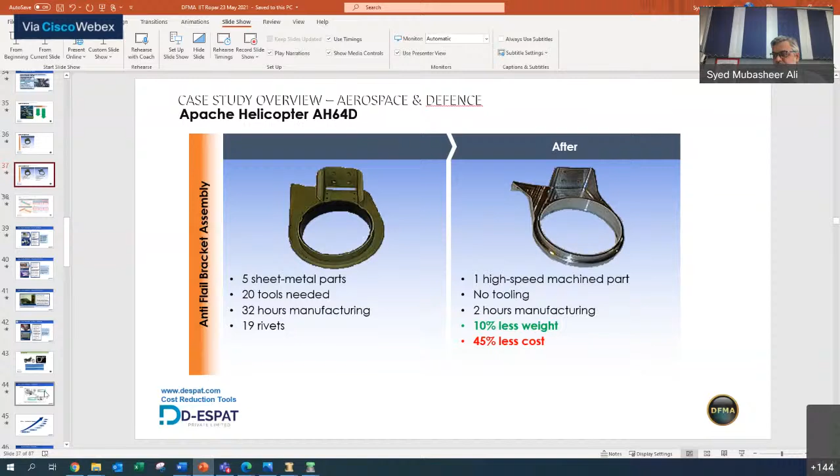As I said, we always talk about, actually I didn't show it today, there is always a better way of doing things. That's what all this means. If you remember the exercise which I showed yesterday, right? Sometimes we do many industry, engineering, and academic projects. Like this example here. This is our academic customer who does a lot of industry projects.

I hope you are able to see my screen. Let me run it full from this current slide.

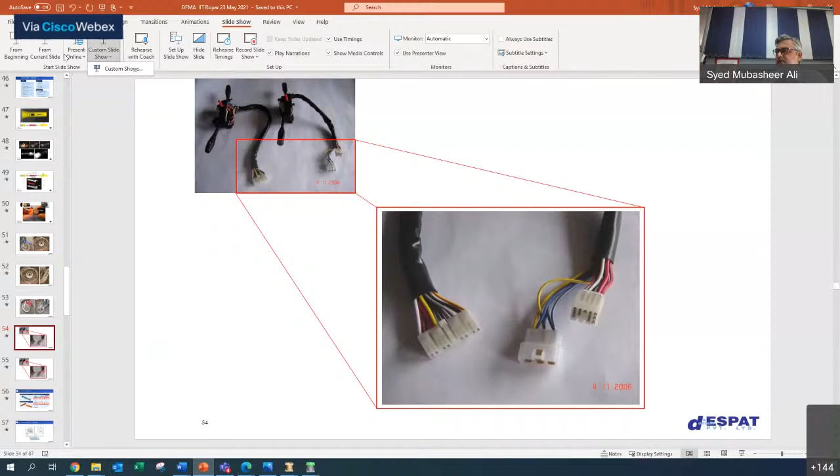Now, this is our customer, a client, and he brought his competitor's product and he said, hey, my competitor is selling more of the sub-assembly compared to me, and I'm losing out to my competition and losing the price war. I'm not able to meet his price targets. This is an old case study. This is the switching mechanism that comes behind the steering wheel of a car.

Do you see what is the difference here? Can you identify what is the problem? What do you see? I've kept it in full-blown markup for you. What about the connectors? Simple. An engineer should call a spade a spade. You see two connectors in one case, one connector in another case. Right? Two connectors adding up to the cost. So when you keep this on the table, I can see that you are already outbeaten on cost. You have two parts compared to the fellow who has a single part.

He explained to us saying, sir, actually, only this was the set of connectors. Then our customer added a few more switching features. So we just put in a bunch of 6 more wires and added another connector to the existing design. We said, if you do a cost analysis of this, the time for assembly, the wire harness cost, even the length of the extra wire, the cost of this additional connector is the difference why your competitor is able to make more money compared to you.

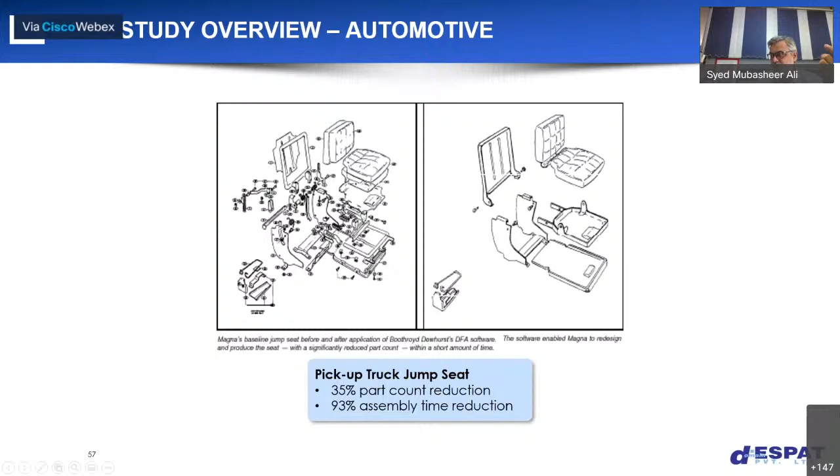This is a jump seat of cars made by a company called Magna Interior Systems. The original design had about 160, 170 parts. Ideally, they were able to get to a 19-part design. But remember, you cannot always manufacture an ideal design. In real deployment, they got a 35% part count reduction, and importantly, 93% in assembly time. This is a product made in the US. What used to cost them $100 today is done in $7. You see the difference? That is the strength of identifying improvement opportunities in a methodical manner using the DFA and DFM tool.

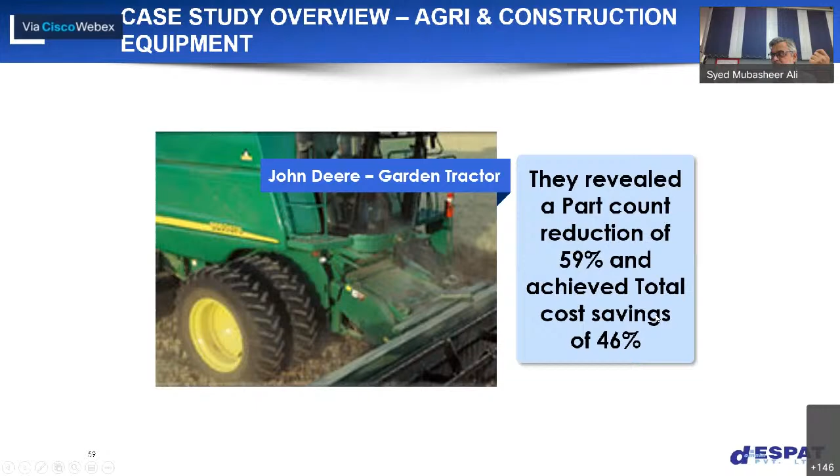Since it's an agri event, I thought I'll put some images from heavy equipment like JCB, where a 47-part design for a backhoe excavator was redesigned to a single part. We have many case studies from customers like John Deere and other farm equipment manufacturers, where they have brought about a good amount of savings in their product.

I used to work with some customers in Malaysia. Malaysia has a national motorcycle manufacturer called Modenas. They work with Kawasaki. The head of the R&D team, I'm talking way back in 2005, 2006, used to say, my dream is to make a motorcycle without a single fastener.

Can you imagine doing something like that? I mean, of course, today many of the parts of the motorcycle are not there. Like, for example, the carburetor is now replaced with the MPFI, right? So nothing is impossible. Just to find different ways of doing things.

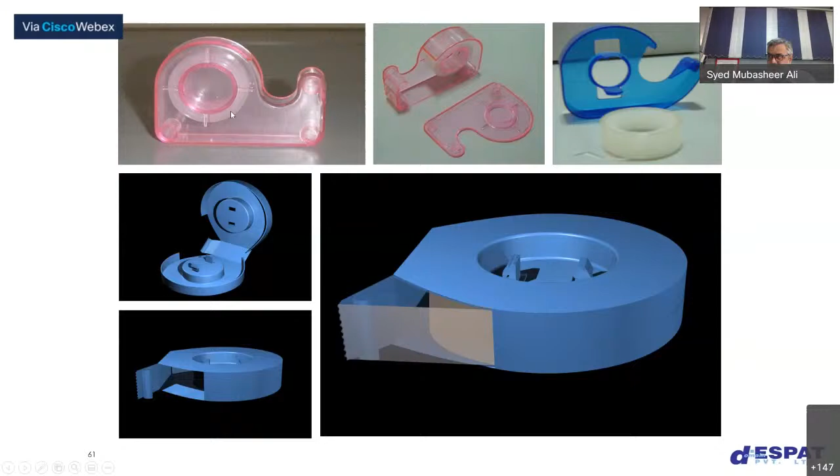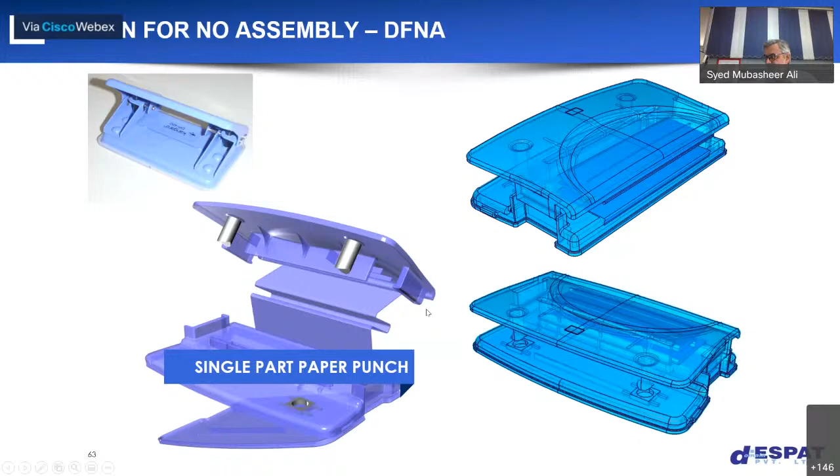And this is done by our folks from a Bangalore university, where they've taken a 16-20 part metal punch design and redesigned it to a single part paper punch. They also gave it a name called Design for No Assembly. Okay, complete with the mold, the insert for these metal parts, and so on and so forth. This is an academic project done by students.

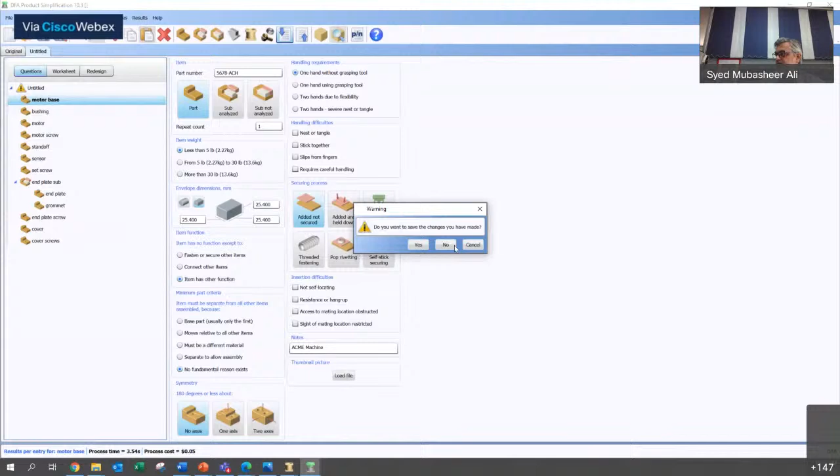We have done some good case studies with students that we actually published in international journals. This is a case study of equipment like a burring tool. I can quickly show you this tool analysis. So this tool was given by a company that makes about 5 or 6 burring tools per annum, and every time they get a new design for the sheet metal burring tool, they go about doing the same thing. So which is designing by habit. When you have the same kind of a process, they just design by habit. So if you see the original design, 374 parts, just have a note of this.

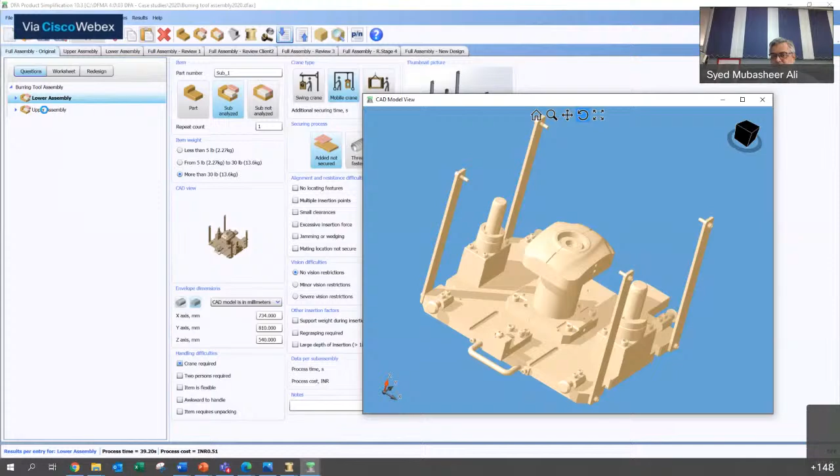It has got two main systems called the lower and the upper assembly. I'm just trying to open up the CAD file for you. I'll also show you the image of this file. Here, this is the CAD file of this subassembly of parts of the lower assembly. It's a really huge file actually. And the reason I'm showing you this is to inspire you guys to take up something which really makes meaning, something where you and your team members can contribute to have a really good outcome of the project that you undertake.

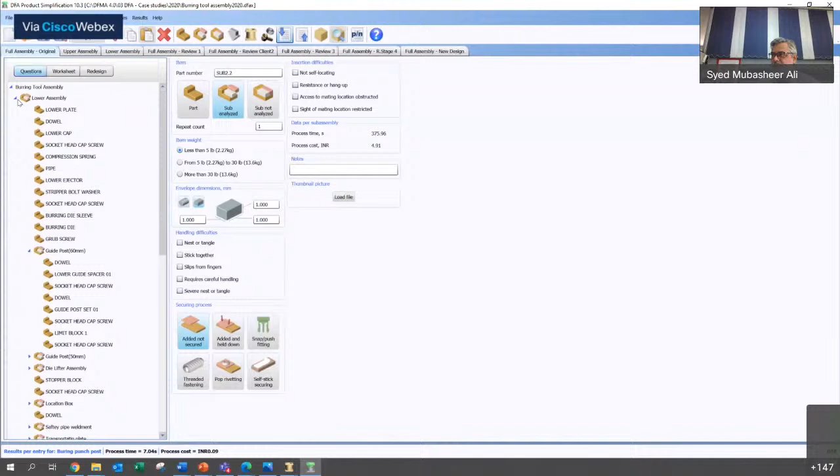So this is the upper assembly CAD views. Let me minimize this. Let me open up the image. This is the image of the file of that part. So this was a big part that we actually modified for the customer, which brought about a change. Anyway, the long story short is, as you can see, if I break up this, there are several subsystems inside it. So this answers another question that you may have in your mind, which is how big an assembly can I analyze? There's no limit to the number of parts that you can analyze in the DFA DFM tool. That's what this is being shown to you for.

So this was the original design, and after a few months of work, from a 374 part design, we came out with a redesign, and then the redesign was further done to a 215 part component. 374 to 215. Nice. And of course, we got it published for the sake of the lecturer who undertook this project and the industry.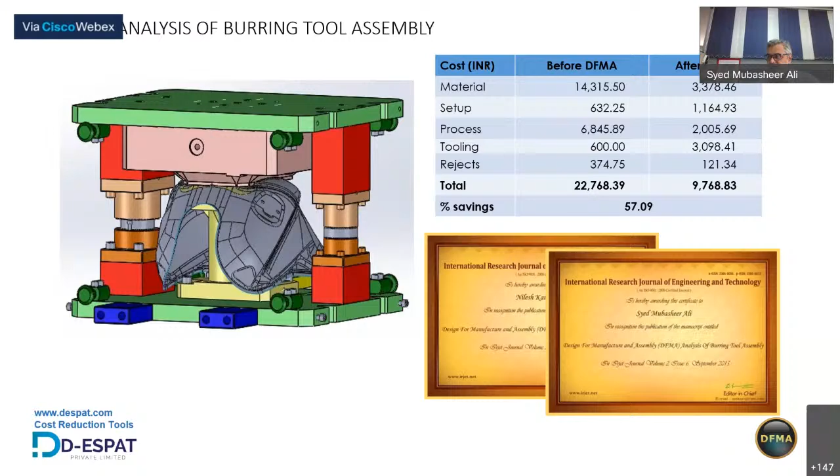So I wish you all the best in doing your own projects. I hope we can find some articles published like this. If it's too good, we'll request your university to send the files to us as a white paper. We will recommend it to the DFMA forum to see if they can include it in the DFMA International Forum next year. Of course, it is their selection criteria, but we'll be happy to do that for you.

Hello? Okay. Am I audible?

Okay. Great. Yes, sir, you are. My chat box was stuck somewhere, so I'm not seeing a yes or no. So

This is one aspect I would like to talk about: casting and case studies. Then there is one thing which many people do: they look at opportunities from other industries that they can incorporate into their own to see if it makes sense. For example, this is a totalizer wheel. A totalizer wheel is, on your dashboard in your car or motorcycle, you have this odometer that goes 0, 1, 2, 3, 4, 5, 6, 7, 8, 9, and then the next digit turns 1. It used to be a 23-part sheet metal set of mechanical components.

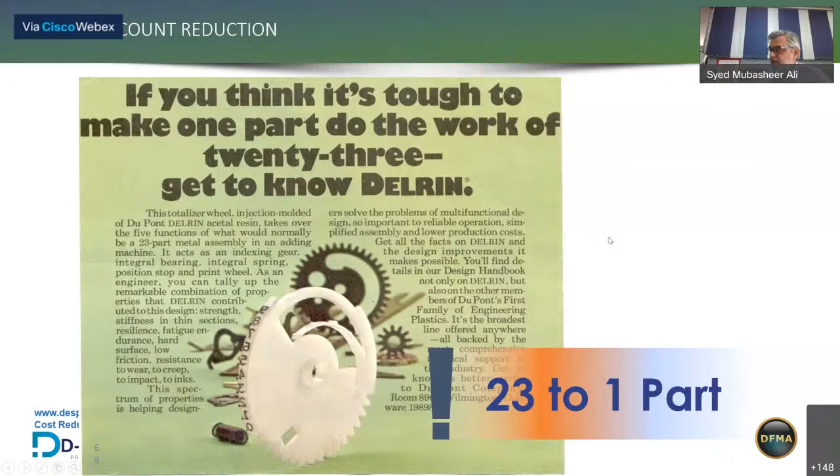If you take advantage of new generation materials, especially plastics, like this DuPont Delrin component, it was redesigned from a 23-part design to a single component, including the spring, the gear, this is the spring component, the counter, all included in one design. Now this is disruptive, okay? From a 23-part design to a 1-part component. So these are very simple examples for you to just think about. Like we spoke about the mobile phone example yesterday, how they used to have screws, how it became a snap fit. Today, mobile phones don't have a battery that you can access. You cannot open your mobile phone at all, right?

Today, when you lose your mobile phone charger, what do you do? Do you go about repairing it? That's a user experience. Just throw it, go get another one, right? So that user experience of how they use the product defines where it is and what it could probably become. So these are other opportunities. I mean, the exaggeration of this is the mobile phone. Buy another one, yeah. So that buy another one approach depends on how you structure the product. That's something customers would do.

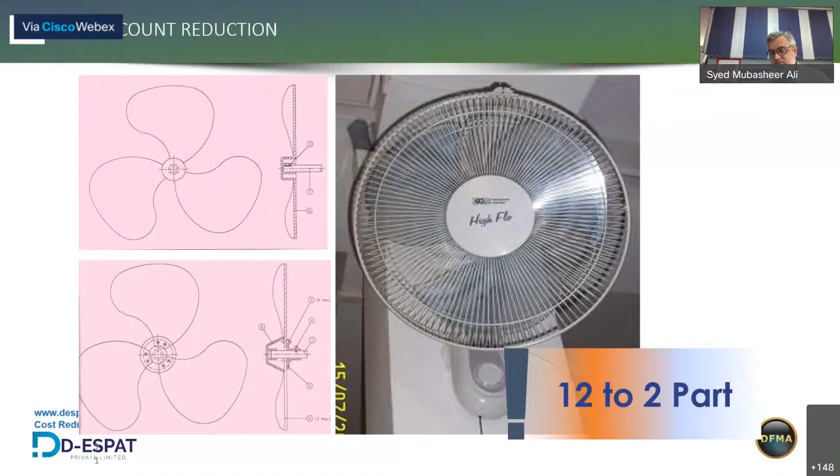So, gentlemen, of course you're all academic students. You're going to get some project opportunities. But if you're part of an industry or you're going to do an industry project, they may ask, when should I do DFMA? Well, it is never too early, never too late. And you must have whoever is your guide or manager help you to do this review. So who does what: your manager or your project leader should facilitate the team to do group work. They should give them the time to carry out this group work, and they should give tools like DFMA at their disposal to carry out activities.

And what the group members should do is take every suggestion as a part of the inputs. Many a time when we work in big enterprises, one fellow will be sitting there, he'll be the Paramatma of manufacturing knowledge in that company. When we make a suggestion: oh no, in my 20 years experience, I know that never happens. This form factor, you can never shape it in this way. I don't do that. I always play the role of the silliest person in the room. Every idea I would put in, because I have a tool that can give me unbiased feedback of my design intent. So please, when you group in, take in every consideration and use the tool to give you feedback of your design intent.

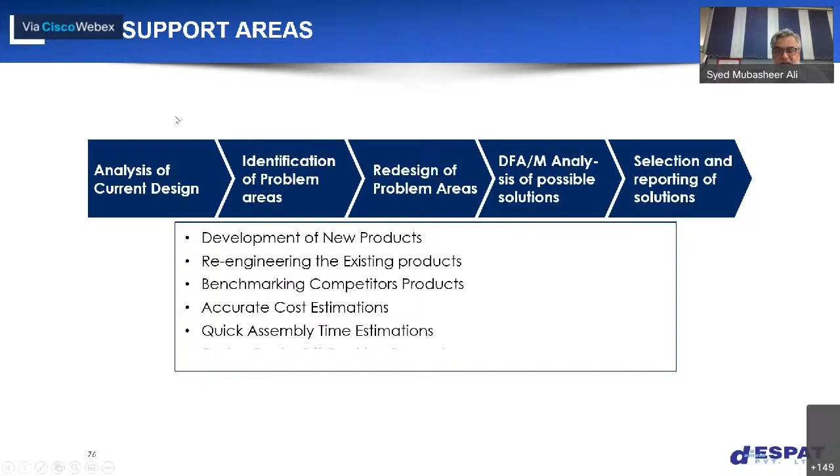Also know where all you can deploy DFMA: you can take up an entirely brand new conceptual product, or you can take a current design. If you notice, in our 3 days of examples, we took an existing design and analyzed it in the interest of our learning. What you do there is identify a problem area you want to improve. Like in our case, we looked at the cover and the end plate as a protection component and found a way to make it a simpler part. Then find out different ways to redesign. Explore the possibilities of making. If you remember the cover: what if I make it in casting? What if I make it in casting in China? What if I make it in sheet metal? What if I make it in plastic? Options. Then whichever makes sense from a business perspective, use it to report.

Now, which are the areas DFMA is used across the globe today, gentlemen? Developing new products, re-engineering, like I said earlier, benchmarking or trade-off with the competitor. How come he's selling more or less than what I am doing? Actually getting good estimates of their predictions, getting time estimation, and making several trade-off decisions.

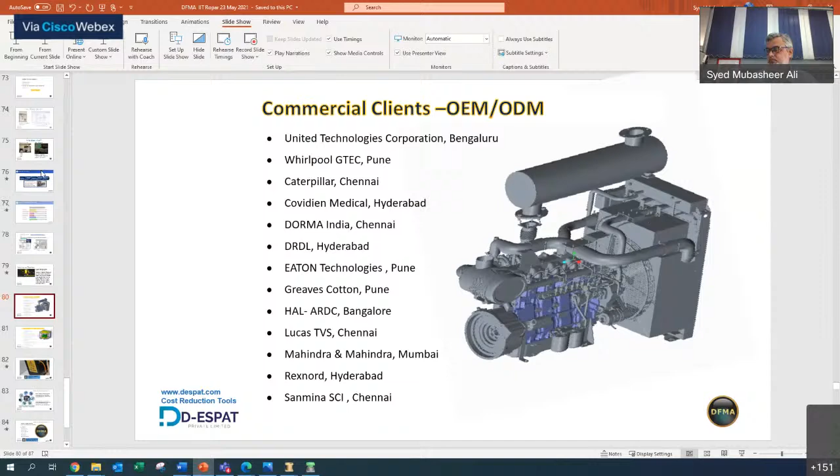This was supposed to be our flow actually. Exit questionnaire towards the last. Balaji, Yogesh, have you already sent the PDF also to the team? Yes, sir. They are uploaded in that assignment link. Oh, that is there, is it? Yes, sir. Both of them uploaded. Great. We shouldn't be calling it group exercise. We should be calling it singular exercise, Balaji. Let's see how it works.

Yeah. Hello, Mr. Syed. Good morning. Yes, good morning, Dr. Dhiraj.

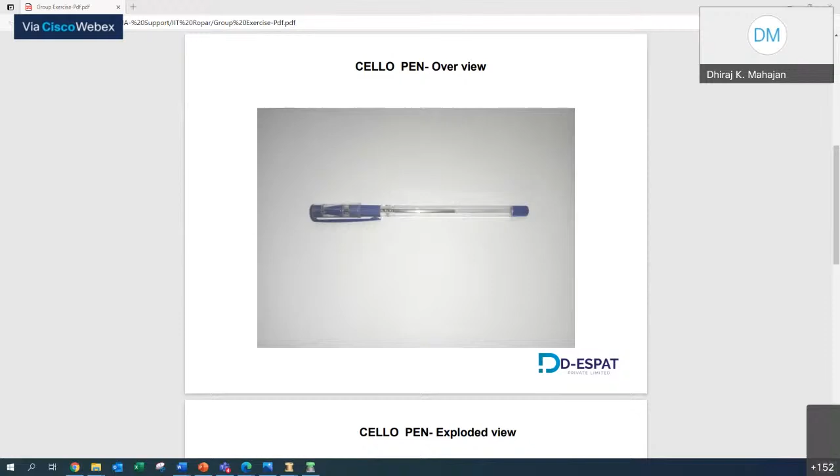Yeah, so I have shared the link with these guys. So they have to go into the assignment sheets that I have shared with them, and the links for the questionnaire and the exercise problem are there. About the exercise, I will describe to them what I want to do. Since we have already shared the PDF, that is great. Once the exit questionnaire part is finished in the next 3-4 minutes, I'll talk about this and then leave the forum open for Q&A and we will end the session today, sir.

Hello? Yes. I think they are getting it. Okay. So actually, I'm opening this feedback to other viewers also who are watching on YouTube. So you will be continuously getting responses. Some kids are doing it on their own. Okay, absolutely.

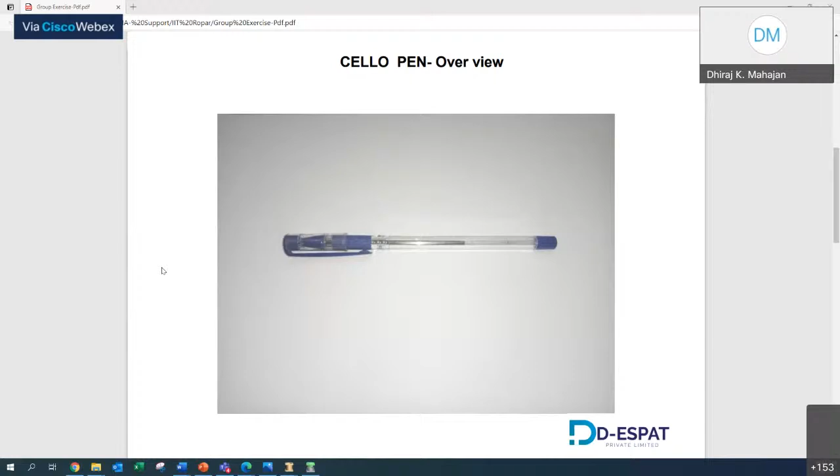Okay, great. So I'll tell you how that should be done, because DFMA is a tool where we say 2 heads are better than 1. So I'll talk about that in a minute. Whatever works for you guys is okay. The objective is just to see the learning and putting it into practice. That's all. This is preliminary. I understand there'll be challenges of learning and actually applying, but with practice, you'll probably become much better.

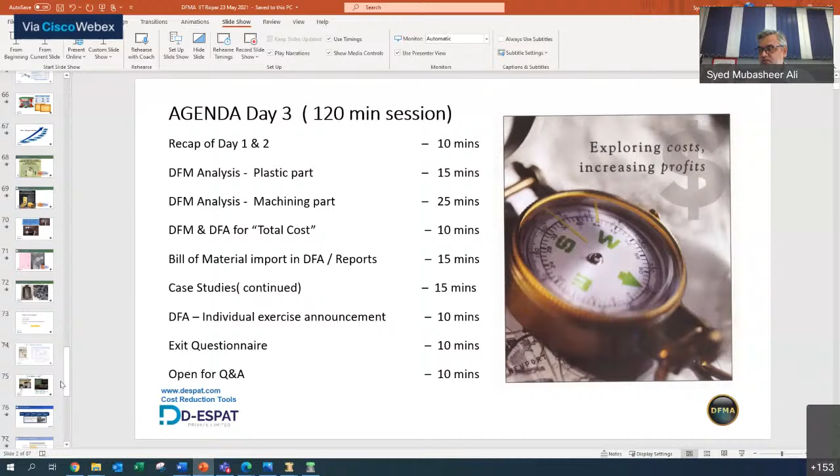So what you're going to do here is a teardown of your component. Are you able to see my screen? Yeah. So you're going to do a teardown, and for those parts which are unfamiliar, you're going to ponder around them. And when you're pondering, if you have some doubts, let me make a new analysis, you will leave notes at the different stages of your parts. You will say, I didn't understand this, or I made this assumption. You will leave notes here.

If you have some ideas, you can even make a sketch of it, on a piece of paper, or a 3D model, or a 2D drawing, or in Paint, and also load those images here in your files. So the more detailed your thoughts are, please lay them out using these tools to explain your idea, your re-engineering idea, or your doubts through the DFA.

You don't have to give a separate document. Yeah, Mr. Syed, I'm back. Sorry, I had to cut a call for some urgent calls.

So what I was telling them, Dheeraj sir, is normally we'd give a couple of hours in that exercise session only. Sure. But I think you marked Saturday as the day of submission. Is that valid for this exercise? Okay. Yes. Actually, they have multiple assignments to do, so they are loaded with a lot of assignments. Okay. I think it's good to give them time, because anyway the software accessibility is with them. So let them take time to do it.

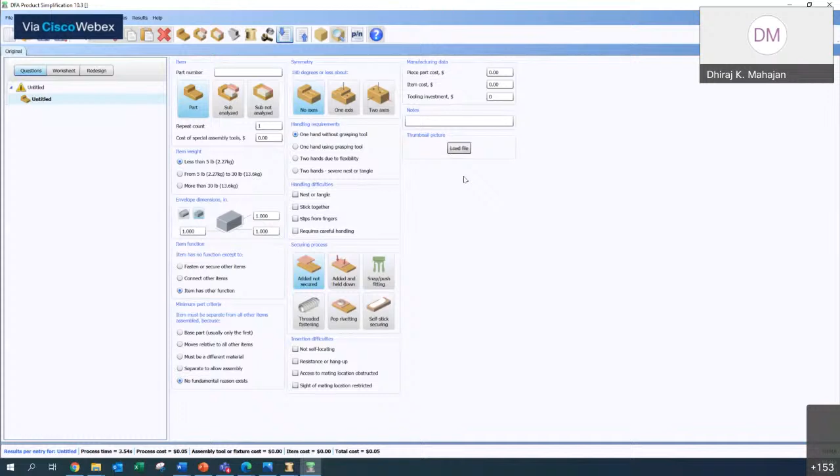Please. And if you have the opportunity and the time and the energy, and you have something at your project, the students can use this tool to validate that also and throw that up. It will be nice to see. Of course, this is part of the teamwork. Actually, when they start the actual project work from the third week, around 7th of June, everything they need to link with DFMA analysis also. So that's the motivation of their training. Okay, that'll be very nice.

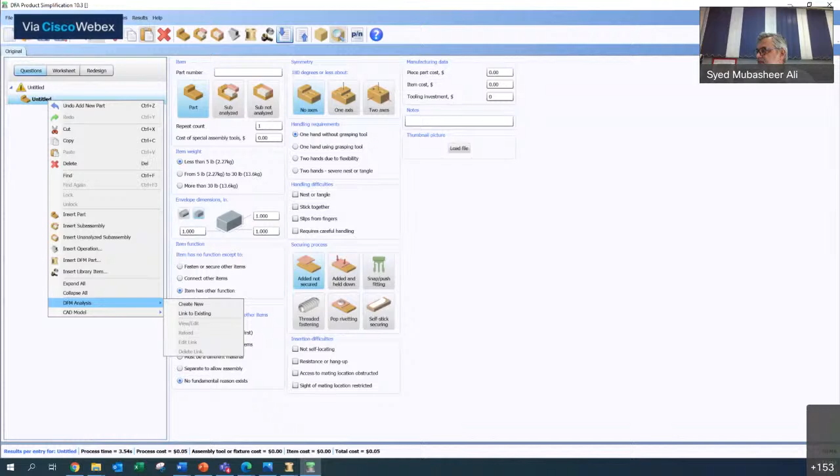So guys, another minute around this idea of the exercise. As I said, you can add notes, you could add your sketches through the thumbnails. If you have the energy and bandwidth, you'll do 2-3 iterations of the proposed recommendations for new product design, and substantiate it by writing your notes. If you further have the time and energy, for 1 or 2 critical components you could do a DFM analysis of the part by selecting what you think is the right material for making that component. Maybe the base part, maybe one of the components. I'm not expecting you to do all of this.

Mr. Syed, they have a question: do they have to upload the DFA file or the report generated as a submission for the exercise? I think a DFA submission would help to review. Of course, you have so many candidates, so I'm not sure how the validation is going to be. We will float a Google form for each assignment, so they can submit both the DFA and the report generated, so that we can browse it. I will put my PhD student teams for evaluation. Sounds good.

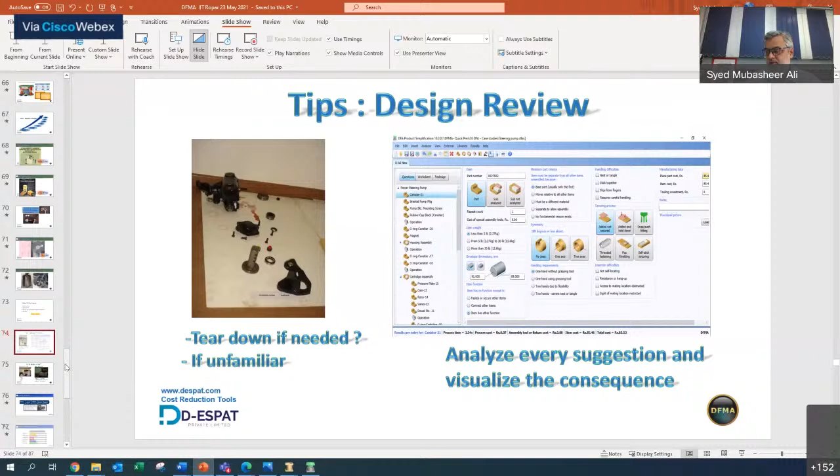Now, this software can be operated by anybody who has an idea for a product and wants to validate that idea from an assembly and a manufacturing perspective. You can't import a CATIA part file. You have to export it out as STP or IGS. Balaji, Yogesh, I request you to unmute yourselves and answer some questions on the chat box simultaneously. We have to export it in STL, STEP or IGS format. Right.

Any other questions? Either the silence is giving me a good feeling that everybody has understood everything, or... Yeah, guys, you have about 3 minutes and 20 seconds, ask your queries quickly.